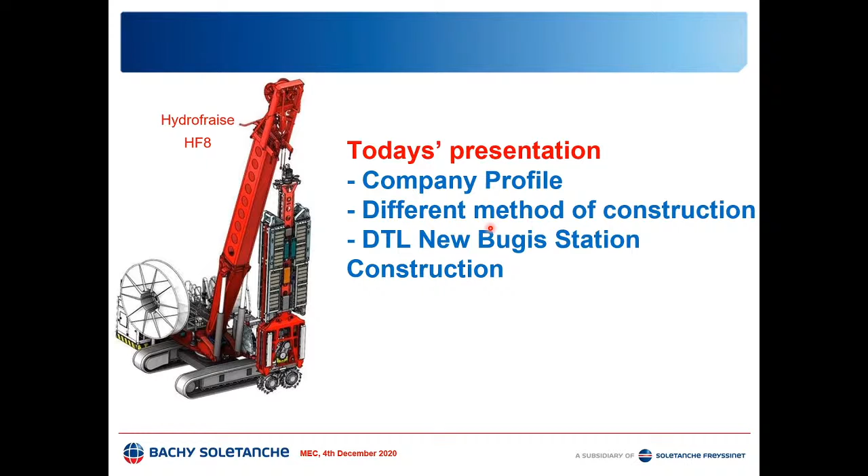Okay, so today's presentation I will split into three parts. One is just a small intro about the company that I work for, and I want to talk about the Downtown Line new Bugis station. But before I do that, I want to explain a little bit of a different method of construction. This is the company I work for.

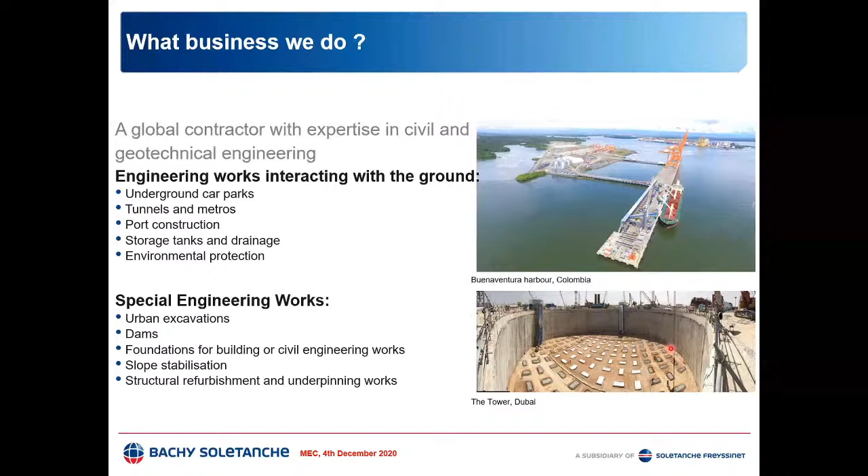And then foundations for buildings or civil engineering works. We do a lot of foundations. We do slope stabilization. We do structural refurbishment as well and underpinning. So the team is important. There are more than 10,000 people working. But what we bring to the field is actually the people. We come up with very innovative design solutions. And there's a very strong plant and fleet, the equipment that we use to construct those. And then our commitment to sustainable development.

Talking about geotechnical, the future is all about sustainable technology, and we need to keep an eye on this as well. So where are we? We are present all over the world, in more than 100 countries. We are well established in 40 countries. In Asia alone, we do close to 400 million euro turnover. The company employs more than 10,000 people, and we have been in Asia from 1938 onwards.

This is KLCC, the Petronas Twin Towers in Kuala Lumpur. I was not part of this company yet because this was 25 years ago, but I was actually working with a consultant who was involved with this foundation design. So I was part of the design team developing this, and I was instrumental in analyzing the pile group and the raft analysis. And by the way, that's actually the deepest foundation in the world at 125 meters.

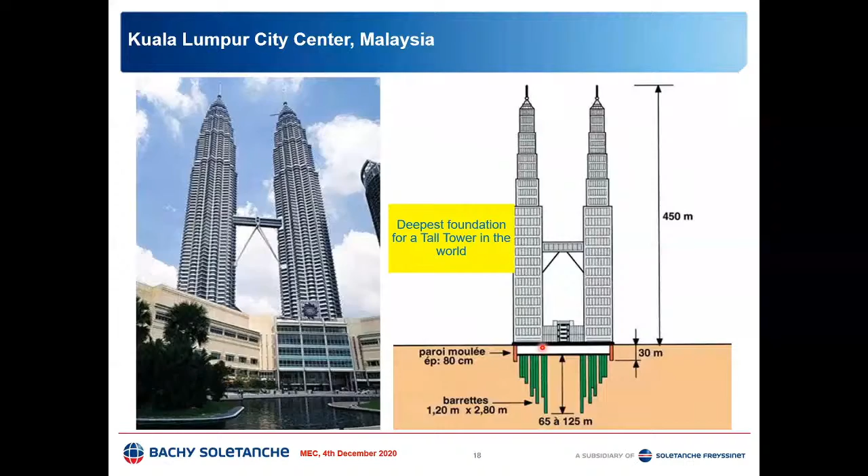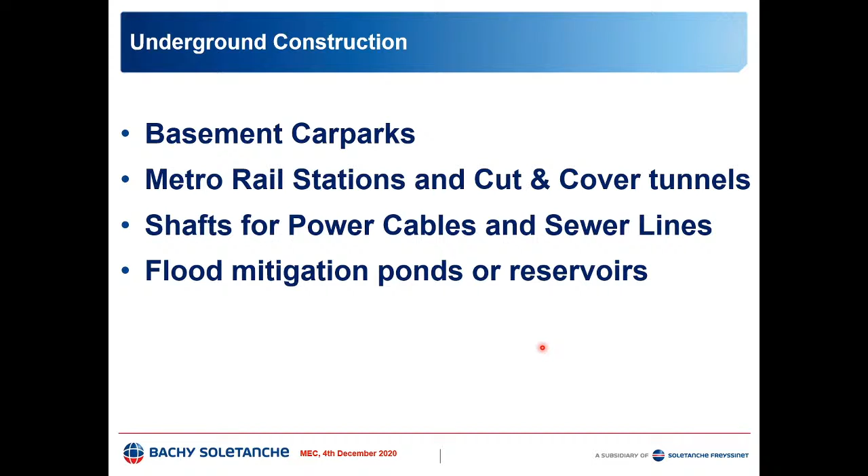And with that small introduction, I would like to get into today's topic. But before I go there, I just want to explain, because in the topic I'm going to talk about, there are 3 different methods of construction that were used: the bottom-up construction method and the top-down construction method. And I want to give a small introduction before I dive into the details. What exactly is a bottom-up construction?

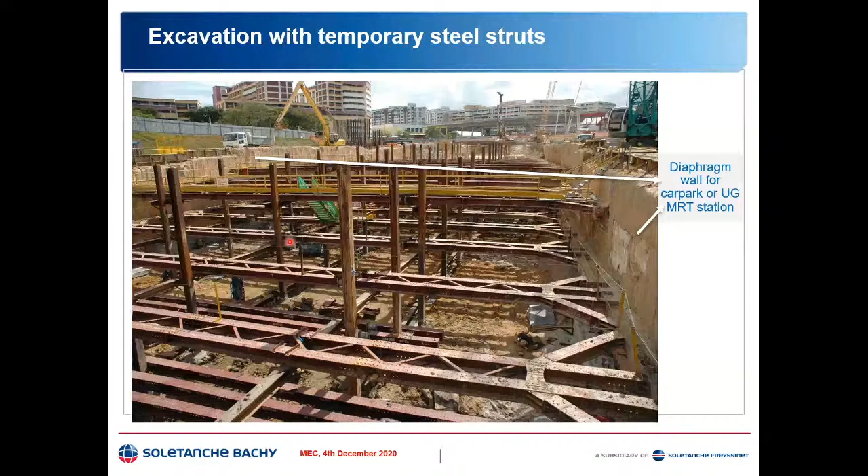So you've got diaphragm walls, which are retaining walls that are constructed on both sides. You can see here there is a diaphragm wall constructed here. There's a diaphragm wall constructed here. People are trying to make an underground metro station here. In order for you to excavate down, you need to have this wall, and you need to have struts that support this. You need to have king posts that actually reduce the span, and then you need to have the walers. Once you've got all that, then you go down.

So the bottom-up construction is you use the steel struts to go down. Once you reach the bottom, you pour your slab and you start making the slabs on your way up, bottom up. When you're coming up, you start to remove these temporary props, these steel struts. And once you have removed them, you've got the permanent box in place and your structure is complete. So fairly simple and straightforward.

What is good about bottom-up construction is this is open to sky construction. It makes it a lot easier for a crane that's sitting here to drop the material to install the struts. Or if you want to pour the slab, you have to put the rebar. You can actually send this through the gaps, and then you can pour your slab with the concrete truck here. And then when you're removing it, it's easy to use a crane and remove it. Everything is open to sky. I will say why this is important.

The next type of construction is you can actually use anchors to do that. When you use anchors, this was the ground, this is the wall you have just installed. You excavate, you install an anchor, you reach the final depth, you make your slabs, and then you go up. Pretty straightforward. This is even better than the strutted excavation because this is completely open to sky. It's a lot easier to muck out the earth from here. And then when you come up, you de-stress the anchor, and then come all the way to the top and complete the structure.

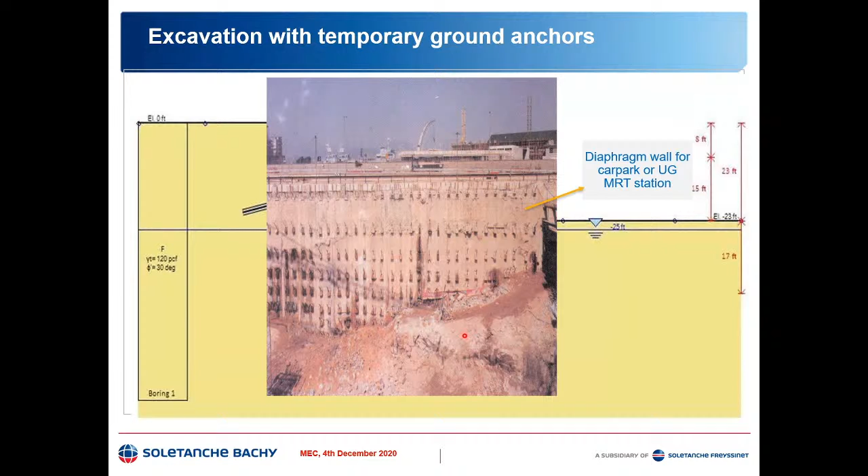Just want to show you one job that we did in Hong Kong. This you can see is almost 25, 30 meters deep. You can have 7, 8, 10 levels of anchors. There are so many levels of anchors, no issues. You install the anchors as you go down. You can see this is a completely open to sky excavation. It makes it a lot easier to excavate. When you have done that, you make your slabs and then you complete the job.

But if you manage this correctly, there is a very good chance that you actually save the money that you spend on temporary props. But also, if you're having a tower in the middle, while you're going down, you can take the opportunity to start to go up. You can actually let the tower start to go up while you're still going down. So there is a time saving. You spend a little bit more money, but it's got some good benefits here.

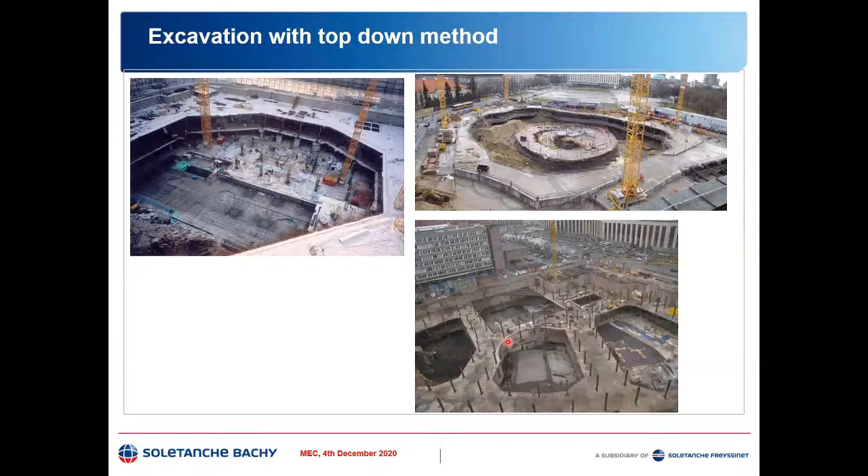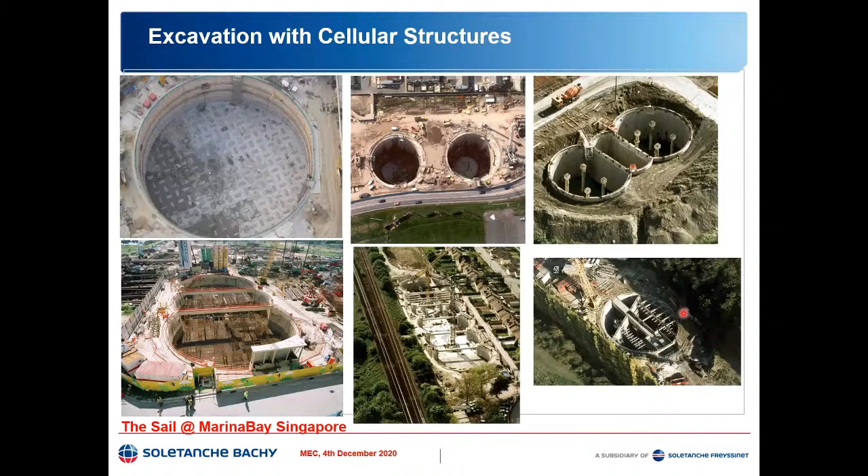So with that small introduction, this is actually the basement we did for The Sail at Marina Bay. This looks like one big circle. In fact, this is a peanut. This is one circle here with a cross wall in the middle. You can imagine how open to sky. It's very easy to drop the material, pour the slab, and reach the bottom. This makes it very, very easy and a very, very efficient system.

So with that small introduction, I enter into the main topic, and I'm going to spend the next 45 minutes explaining this. This is a very complex project, and I hope you can follow. And if you have any questions, please ask, and I'm happy to share what we have done here.

So, new infrastructure in a mature and urban environment. The new projects that we do in Singapore, Malaysia, or in Delhi, Chennai, Kolkata, or in Kochi, are no longer done next to a green field. There are already existing buildings. There are people living there. So there are things that you need to take care of. With all these constraints in mind, you should still come up with a safe way of constructing all this.

So you need to come up with some innovative solutions to resolve the problems that the expansion of underground infrastructure brings. You can always put it above ground. Once you do that, there are a lot of constraints. If you want to make a road underneath or you want to have a facility crossing, that's not easy. But if it is underground, you can do a lot of things on the surface. But of course, you need to make sure that the underground structure doesn't move in future.

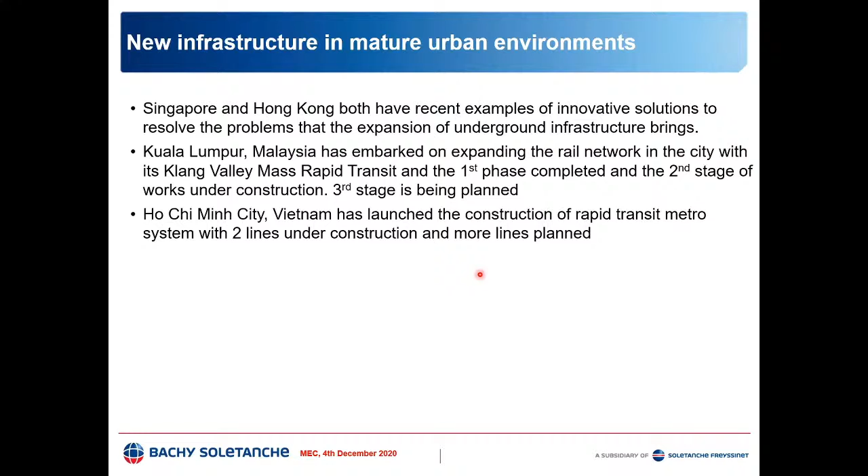So Kuala Lumpur, Singapore, Hong Kong have done quite a lot of work. Kuala Lumpur has actually done the first phase. The second phase is under construction. The third is being planned. Ho Chi Minh City in Vietnam has 2 lines under construction. One is already in operation. And India, of course, is one of those places you want to be.

If you want to be in underground construction in metro: Delhi, Mumbai, Chennai, Bangalore, Kochi, Kolkata have operational metros, and in many cities, Pune, Hyderabad, a lot is under construction or under planning. So if you really want to be in this, the next 20 years in India is the place to be.

So in this presentation, we are going to look at a new Bugis station. I will go into the details shortly. This Bugis station is actually in a very congested environment, and how we managed to construct it is what I want to show. Before that, I just want to give a small intro to the Singapore MRT system. This is the system map in 2020. I won't go into the details, but you can see the different colors.

There are east-west lines that run from the west to the east, to Changi Airport, and there are north-south lines, north-east lines, circle lines, and this is what you have at the moment. There's a downtown line, which is the blue line, and you can see here it just circles around and goes to Changi Airport again. But by 2030, you can see that this map will start to look like what you see in Tokyo or in Paris or London or New York.

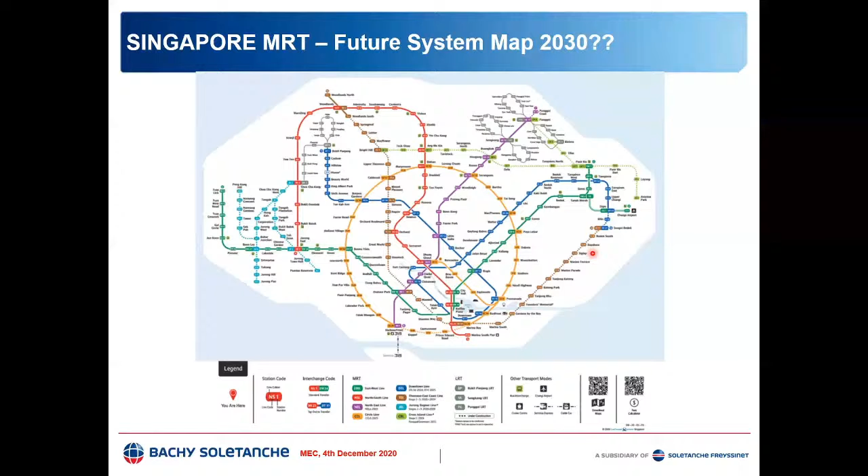So this is supposed to cross 360 kilometers by 2030. And there is a Cross Island Line which is under construction, which I'm tendering at the moment. So there is a huge amount of work being planned in the next 10 to 12 years. These are the future lines. I just want to give you some line names: Tuas Extension, Jurong Line, which is under construction. Thomson East Coast Line should open completely in the next 2 years.

Cross Island Line, the eastern side is being tendered, the western side is just being designed. Northeast Line, which is already being extended. The Downtown Line, which is in operation. There are a lot of things under construction in Singapore. So now Singapore has a network of 122 MRT stations and 40 LRT stations across the island, and more to come.

The railway network is one of the most popular modes of transport in Singapore. The whole idea is to make sure that nobody walks more than 10 minutes to reach an MRT. This is actually the government's target. With that in mind, they are coming up with so many lines: the Cross Island Line, Jurong Line, Circle Line, Northeast Line, and Downtown Line. So by the time we reach 2030, we'll be at 360 kilometers. That's the goal, and I think we will get there.

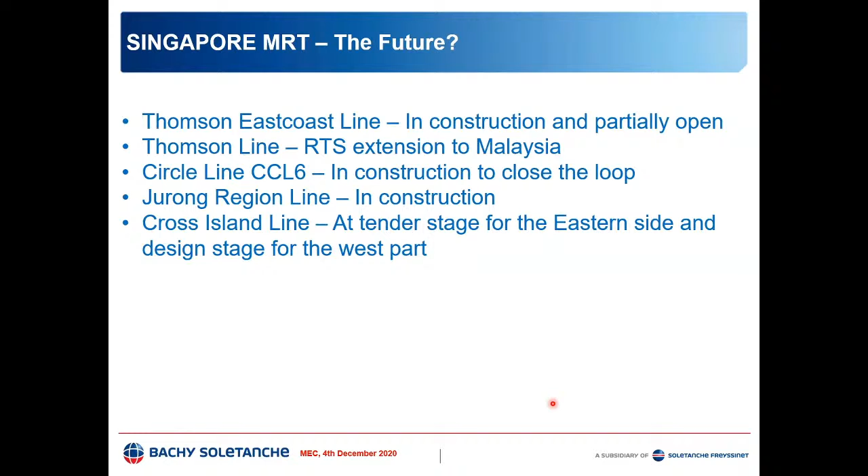The future, this is what is being planned or constructed: Thomson East Coast Line, Thomson Line, Circle Line, Jurong Line, Cross Island Line. This is the map again; I just wanted to show where we are. The project we are going to talk about is Bugis, the blue line, which goes below the green line. That's actually the main challenge. This line is to be constructed underneath the existing green line, which is the east-west line.

So just some intro. The client is the Land Transport Authority. The designer is Arup, supervised by a firm now called Golder. It has been in operation from 2013 onwards. The station's basic structure was completed in 2011, with the system-wide rail contractors coming in over the next 2 years to finish it. We got the job in 2008, so it only took us 5 years to complete the station and be operational.

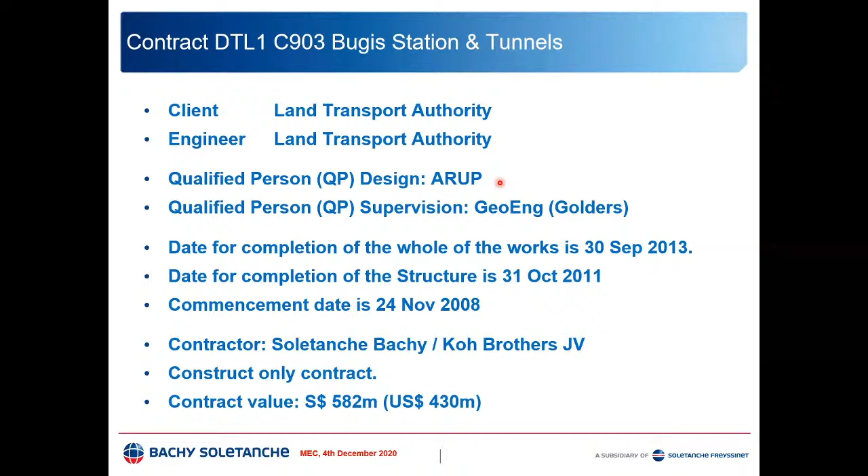Soletanche Bachy is the company that I work for. We are in a JV with another company called Koh Brothers. This contract is worth almost $600 million, which is roughly 3,000 crores. I don't have to go into the details. There are a lot of diaphragm walls, grouting works, mining works, and a lot of civil works. It's a huge contract.

So exactly what are the constraints we have? What is this area? This is the station we want to construct. It is next to a hospital. Once you have a hospital, this is a sensitive area. You need to make sure that your vibration is controlled, your noise is controlled, the dust is controlled. There are a lot of controls in place. And this is actually an office.

This gives you a bit more flexibility, but in terms of engineering you still need to make sure you don't create any settlement next to the building while making this station. This is actually a shopping area, which means there will be a lot of people crossing the road in the daytime or evening, and when they do that, they stop your work. So you need to manage that on top of the traffic.

This is one section of the area where there are old shop lots which are 80 years old. You need to preserve them, and there are people living there, which means you can't work at night. This makes it a lot more challenging.

And you have public housing, almost 600 to 800 families living there. I'll show some photographs later. This means your noise has to be controlled, your dust has to be controlled, and you probably can't work at night. There's also a sensitive 80-year-old row of shop lots that needs to be protected, I'll show this later. And there's an office where a lot of famous engineering offices are located.

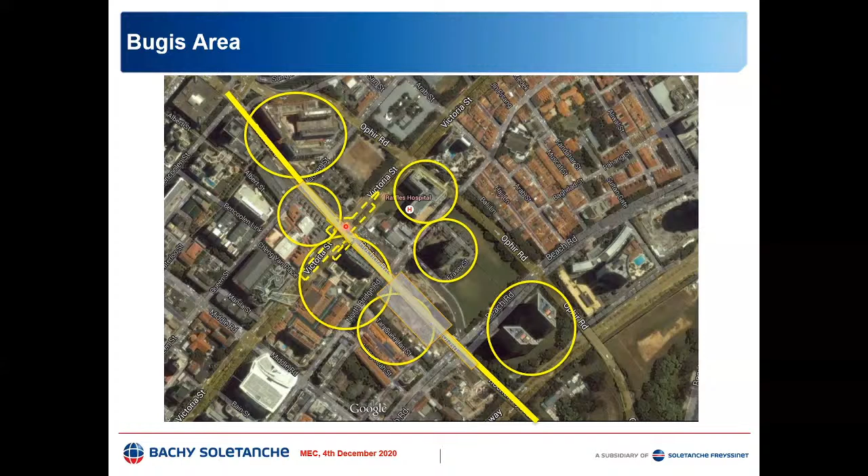There is an existing station that runs east-west, and what we want to do is make this yellow line underneath the existing station. So we will see the challenges in the next few slides.

Just some introduction, there's a couple of pictures to show. This is the main road, and under that we are trying to make the new underground station. This is the east-west line, there's the existing station, this is the shopping area, this is the hospital, and this is the sensitive old shop lot I talked about, sitting on mixed foundation. This is the public housing I was talking about. I'll explain a little more in detail.

One thing I want to highlight is these trees. They were there 15 years ago and are still there, we are not allowed to chop even a single tree. There's a tree here, we accidentally chopped one branch because a crane fell down, and there was a fine of $15,000, roughly 8 lakhs. That's the kind of imposition by the government, and that's why they're called a garden city, they try to maintain the greenery while building so many structures around it.

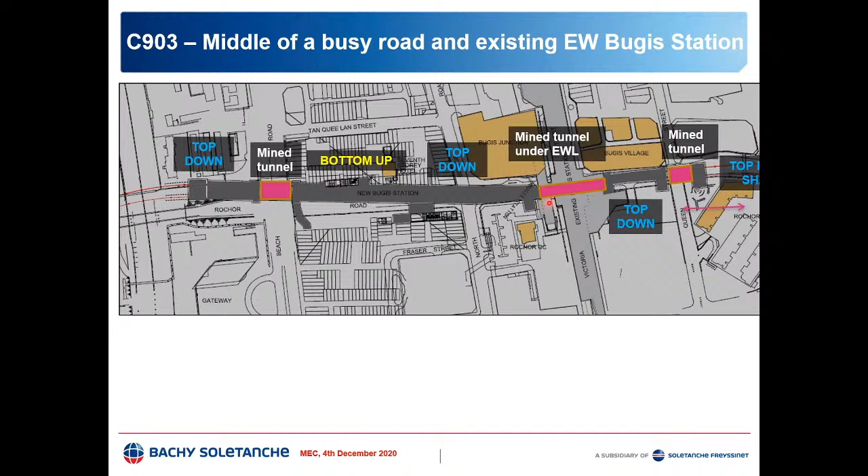So this is the engineering part of the presentation. This is the station we are trying to construct, you can see it's built in a few parts. This is the layout, and you can sense this station is not a small one. It's 600 meters long, that's huge.

Typically stations are between 200 to 250 meters, but this one is very long because it had a few junctions to cross. There's a main road here, and there are 4 major arteries, one going into the city, then 2, 3, 4. There's also a main road coming from Changi Airport, an expressway with a huge amount of traffic. You can't afford to just start digging here, you can swing the traffic on one side but not the other because they run in two directions. It makes it really challenging. And of course, this is the existing Bugis station, and we have to get underneath it.

You can see on the left-hand side there is a cut and cover tunnel where we need to get underneath. You need to maintain this. You need to cross, there's a crossover here where the train lines will cross over. And then you have two shafts, and you use that to do a mining activity here.

So this is actually the station. Of course, you have the entrances you need to build. This is the existing station, so you need to mine underneath. This is actually another interchange here and here, so you need to mine underneath using some shafts.

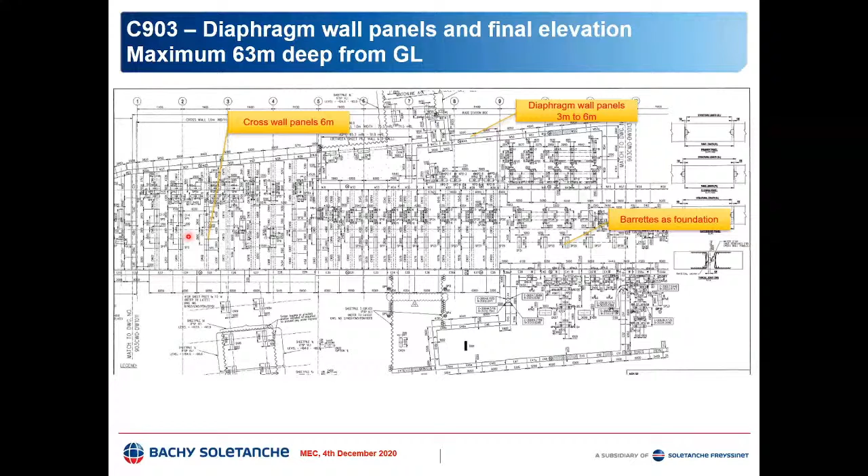Now how was this done? This was done using diaphragm walls. You can see the station perimeters using diaphragm walls, and we use Barrettes as foundation - these are rectangular foundations, like bored piles, but rectangular in shape. You can see the cross walls running between the diaphragm walls to beef up the robustness, and this makes the system very strong and reduces the deflection and thus the settlement.

And these are the design parameters. In Singapore, these design parameters are defined by the engineers, so these are control documents. If you need to change these parameters, you need to spend quite a bit of time to convince the client. So the bottom-up section - that's the reason why I gave an introduction at the beginning.

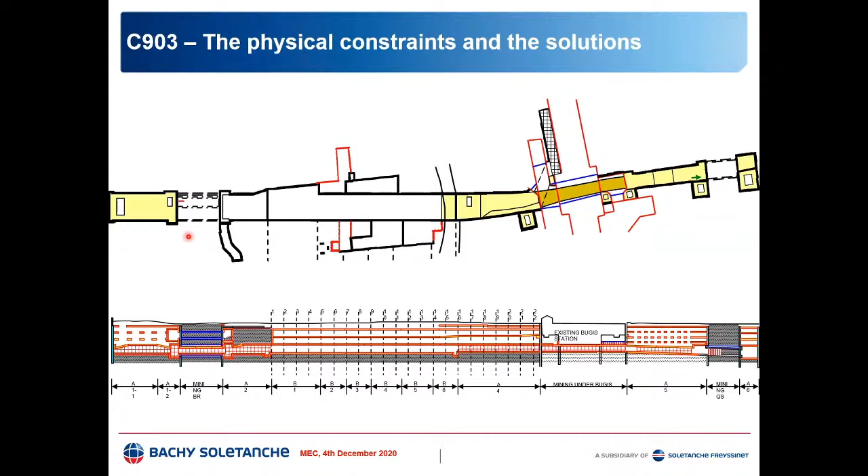So this was done - you can see here, this part was done in top-down, this is in mine, this is in bottom-up. The station was done in bottom-up, cut and cover done in top-down. This is a mine section, another top-down, and then you have another top-down and mine section. That's the reason why I gave a small introduction on bottom-up construction and top-down.

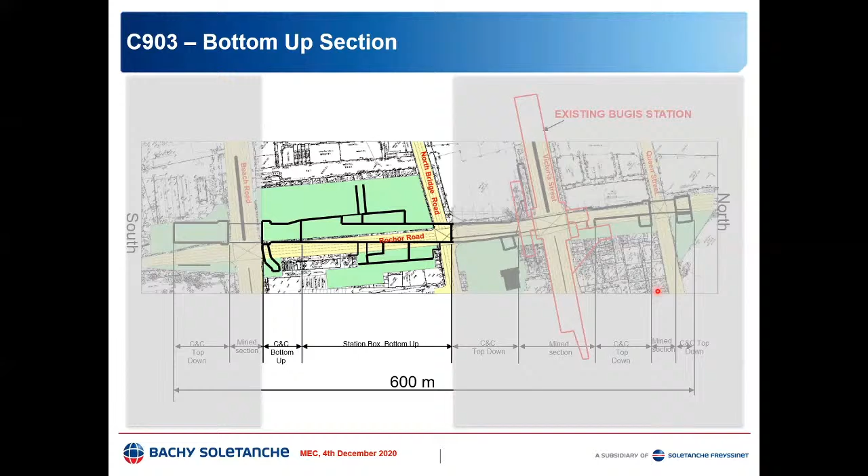So here, just to show you the sections where we are actually doing them in bottom-up. So what exactly is bottom-up? You need to have two diaphragm walls on both sides.

Just keep an eye on this - this is the diverted Rochor Road, meaning the traffic is running here. I will explain with some photographs later. So the traffic is diverted, so you can actually mobilize your equipment to start making the diaphragm walls.

What you want to do is the jet grouting. So you make the diaphragm wall, you make the jet grouting. And then in the next stage, you finish the diaphragm wall on the other side. You actually drive sheet piles on both sides, which I will explain why later.

Once you have done this, you can start excavating. The traffic is still running outside because you start to excavate here. Because this is an open-to-sky excavation, the traffic can never come back to here until you finish this. Bottom-up means you put the struts, go down all the way, and then you come up and remove the struts - until then, you can't have traffic running here.

This is what has happened here. You can see the people have gone down with a few number of struts and they reach the bottom and then they pour the slab. You can see here, you have reached the bottom, they are making the slab.

Once you made the slab, you start to come up, you put in the other slabs, and then you actually have to backfill this to put the traffic back, and because of that you need the sheet piles on both sides. Once you have done that, you backfill, you reinstate the traffic back on this. Now the station is completed.

So you use all the struts to go down, and then you pour the slab. As you come up, you remove the struts, and then finally you pour your roof slab and you backfill on top. Once you have done that, you start to backfill this as well, reinstate and pull the sheet piles out, and then you open the traffic again.

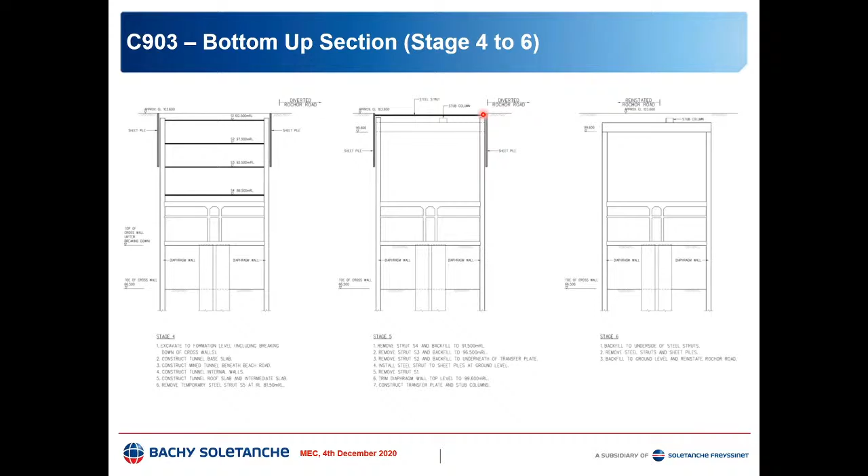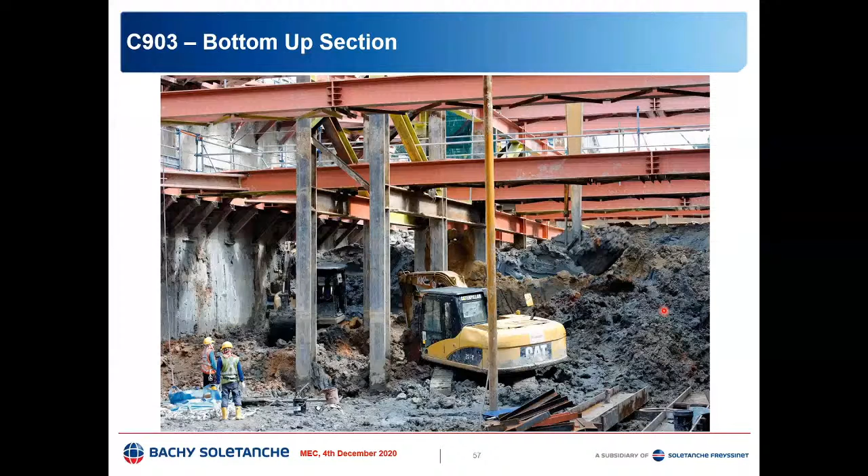So this is into the construction itself. You can see these are soft marine clay. I think Singapore has a lot of marine sediments, so these are very soft material. The struts are installed, and I think we installed 9 struts on the way down.

One of the biggest challenges when working in the city is utilities like this. You can't snap these utilities and push them away because some authorities don't give you permission to do that. You need to support this while working on both sides. You're going to excavate 27 meters below, but you need to have this utility supported right until the end. So this is one of the biggest challenges. Although there was an advance contract, some utilities cannot be diverted, and we had to take care of it.

So now, as I said, the traffic was being swung here because there is quite a bit of work to be done. You remember the traffic was running here? Now you see quite a bit of work is completed. You see the traffic here, then we start excavating down to go further. The important thing is the trees are still maintained. You can't chop the trees - if you do, you can lose the license and get kicked out of the project.

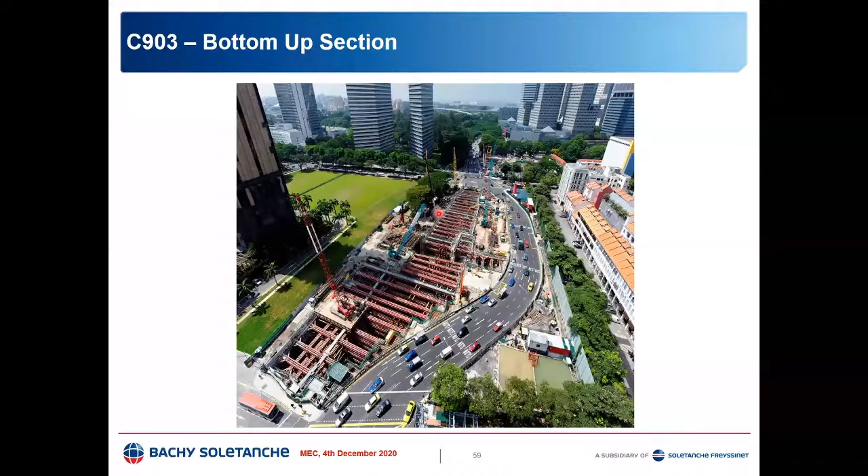Right, so now here we have excavated. You can see here we are about to pour the platform, the under-platform slab. You can see the series of struts that are there - these are the diaphragm walls that we make, and these are the struts. There's a lot of cross walls here that support the diaphragm wall from moving in and reduce settlement outside.

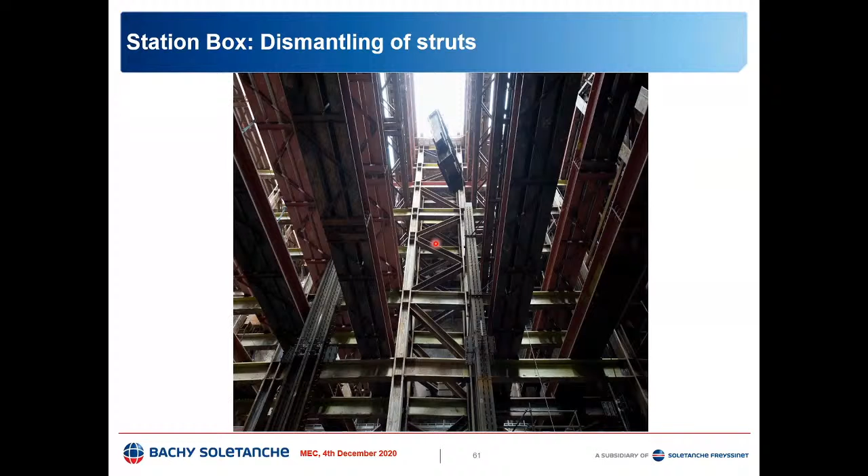You can see the number of struts - there are 9 of them from top to bottom. You can see that people are dropping material through the gaps, so there's a lot of engineering planning behind this. Now this is nearly done - I think this is one of the openings for the extract fans through the slab.

This you can see is nearly completed - the diaphragm wall on the right-hand side and the slabs are completed. When the work is completed, you can see the hole is gone. They have already completed the roof slab and are doing the last backfilling, with the last struts still there.

So they're coming from there to here. The struts are being removed once they finish the backfilling. Once that's done, you put the traffic back and straighten the road, and the work is completed. Next, you hand over the station to the system-wide contractor to come up with the rails.

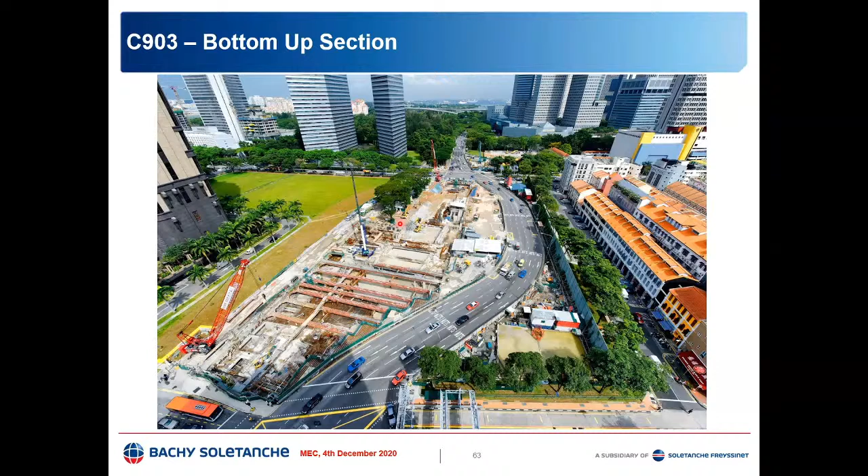This is the completed station with the bottom-up section. So next is the top-down section.

There are areas where you couldn't actually do bottom-up construction, because there is a place where you need to maintain the traffic on top. That means it's a cut and cover tunnel. You go down, you make a roof slab, you backfill, you put the traffic back and you start mining underneath. This is actually the top-down construction, done where you just couldn't do bottom-up construction.

You can see here there is no room. There's actually a shopping mall here, a community center and a car park. You can't divert the traffic here. They have no choice. You can't close the lanes because if you had 5 lanes before, you still need to maintain 5 lanes during construction.

So you have no choice but to do a top-down construction. You make 2 walls, excavate a bit, pour your slab, backfill, put the traffic back, and once this is done, you can start mining underneath. You need to excavate below, casting the slab as you go down.

How do you do this in top-down? First you do one side of the wall, then the other side with a sheet pile installed. You cannot pour the slab because to do that you'd have to close the traffic. This is not possible because there is a building on the left and a car park on the right. So they put the traffic here and then go down to make the roof slab.

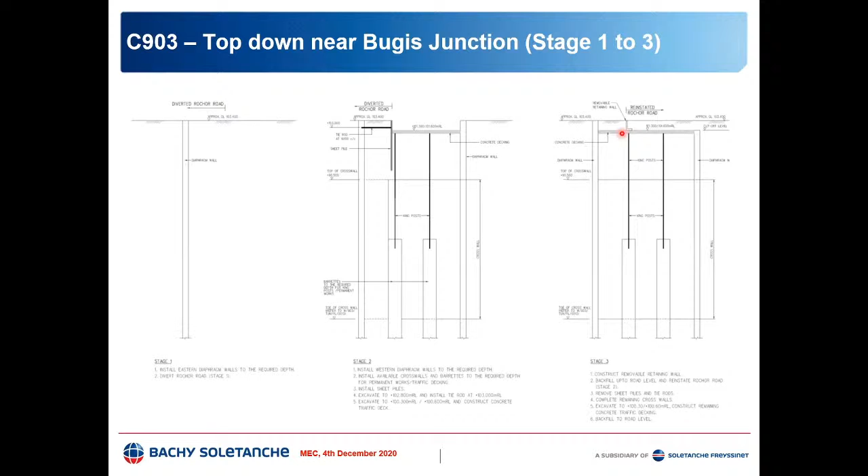Once this is done, you have to make a small retaining wall inside to backfill on this side. Once done, you can reinstate the traffic. You can see here you have not excavated, but the traffic is back. With this decking in place, you can continue excavating.

Now the traffic is running on top, but because the decking and roof slab are there, you start excavating, make the next slab, excavate, make the next slab, go down, and make the platform slab and the platform.

So this is where the trains will be running. Once finished, nobody knows that you're actually making a 27-meter deep excavation underneath. The traffic is running like it has been before, and this is completely reinstated when the work is completed.

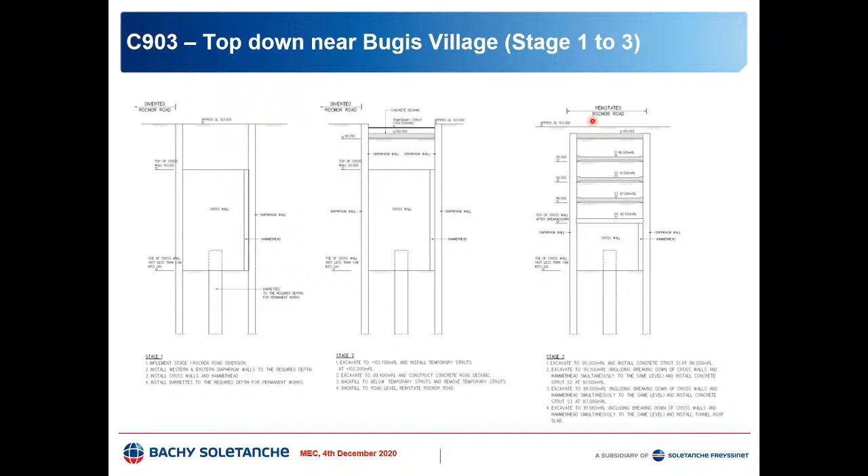It's exactly the same. You install the 2 walls with diverted traffic. Once done, you go down and make a traffic deck and then your roof slab. When this is done, you reinstate the traffic, and once that's done, you go ahead and finish. You go down, make the next slab, excavate, next slab, all the way down, and you have trains running here. So that's the way this top-down is done.

So I just wanted to show you some pictures. This is actually a portion where the top-down construction was done, somewhere around this width. They managed to cut into part of one of the car parks, so they maintained the number of lanes. Eventually, the traffic has to come here.

Now you can see here we are working next to this building. You may think that this is a cheap building, but it's actually 80 years old, sitting on mixed foundation. This can settle even for the slightest movement. We are working so close to the structure. The business is in operation, and you can see the machines working 1 to 2 meters away from the building. We are installing some sensitive diaphragm walls here.

And once this is complete, we actually reinstate the traffic and mine underneath here. That's the point of this whole thing.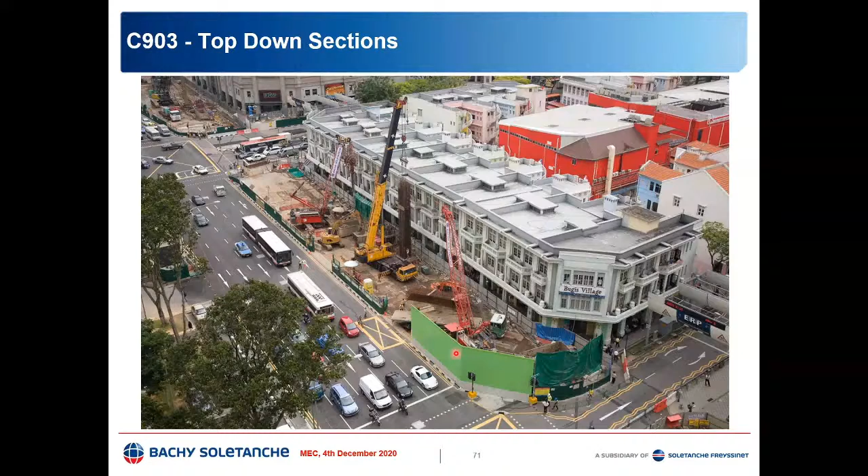I wanted to show you another view of the same thing. You can see that same building, and you can even see that it's tilted. This is 80 years old; people have worked over the years and it has actually become like that. So it's very sensitive, you have to take care of this. And you can see here, there's a view.

We are actually dropping a diaphragm wall cage, and you can see the public housing at the back. There are about 5 or 6 blocks. They are demolished now, but there used to be 500 to 600 families living here. Any small noise, people will complain from there. We have to be very careful.

So the machines, you can't just simply use any machine. So we have actually come up with a lot of innovations. We have to actually cover them up, and we actually have to make sure that they don't overheat. We need to provide the ventilation. Of course, for the guy who's working inside, we have to provide an air-conditioned cabin. And these machines are some of the silent machines that you can find.

So this is another view from the public housing. You can see that the traffic is being diverted. This is actually bottom-up construction going on. And this is where the top-down was done. And they reinstated the traffic, but they are working on this side because there's mining work going on underneath. This is the existing station. And there is mining work going on here, but you still need to maintain this road.

This is the reason why you cannot just simply dig a hole and finish this work. You need to maintain the traffic. That's the reason why you have to make a shaft on this side, and you mine underneath it. I'll show you some of the details, how the mining is done. You see, this is actually the shaft where I'm going to mine underneath. I have a shaft on the other side where I'm actually driving my pipes and mining. This side I'm mucking out.

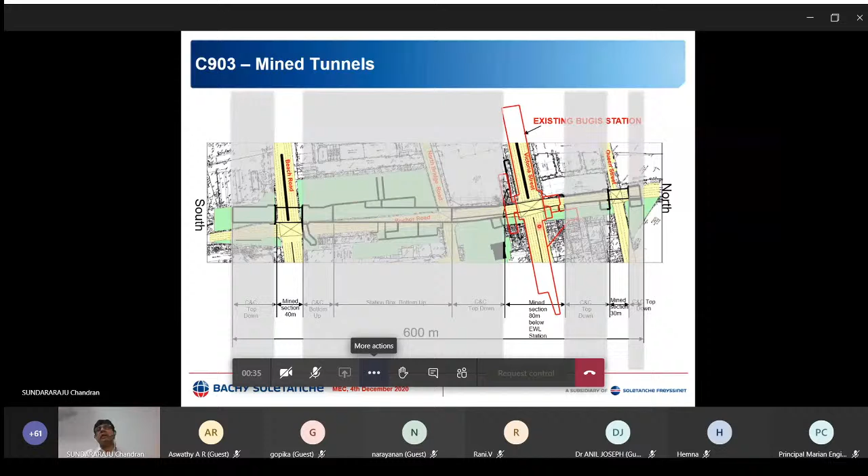But when I'm mucking out, I'm using the telescopic excavator. But of course, it's noisy. These people will complain. We did this almost 35 years ago, 1985. And I think Dr. Anil said he referred to that paper in his 1992 PhD thesis. So the chemical grout piles were done. The diaphragm walls were done by us. So I will just show you some of the details.

This is just a 3D view of the mining. The mining is actually done underneath the existing station, under Queen Street, under Beach Road. These are the 3 areas where the mining is done. So what is mining? What you normally need to do is make a shaft on both sides, install these pipes horizontally on the sides, the top and bottom. Once you have done it, the soil is secured inside. You start excavating inside this section.

You excavate 1 or 2 meters. Of course, the soil will start to collapse. So you need to start making these frames. You make these frames with these columns, the girders. Once these are done, you advance another 1 or 2 meters and you put the next piece of girder. And then you excavate further. So you keep on moving further using all these equipments. And then you keep on putting these girders and the frames in place, which support this roof and the pipes. And that stops the soil from settling down.

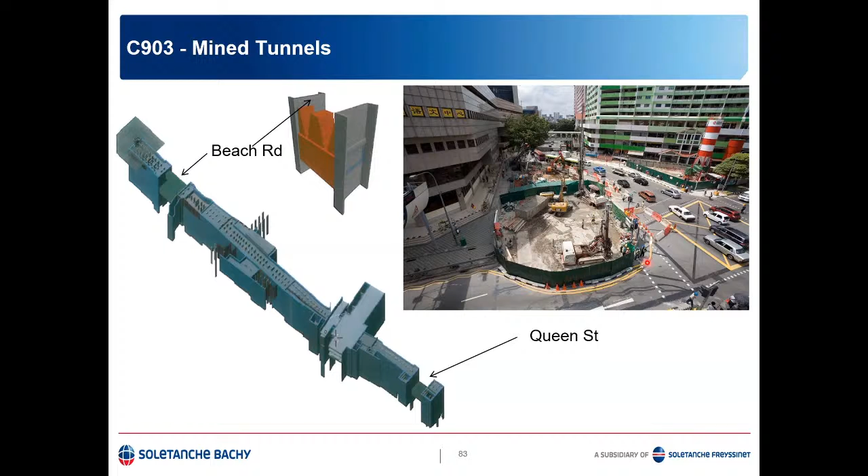If you have a live station running above, which is actually what we have, once these pipe roofs don't move down, the train operation is not affected. They can continue to be in operation. This is actually the principle of the mining that was done. So this is actually on the northern side. You can see here there is a shaft made on this side and this side to do the mining.

These are just some of the busiest roads. You can see the shaft here, and there is also a shaft from this side, which is part of the cut and cover. And the mining is happening underneath here. I will show you with a schematic sketch later. Once that mining is done, you go down to the wall here. The wall here, you have to cut through the wall to make the rectangular box. That's exactly what this photo is doing.

So the guy is actually cutting. He's actually coring through horizontally. And then these blocks will be removed. Of course, there's soil behind which can fall on your face, so we need to take care of this. I will show you what we do to take care of this.

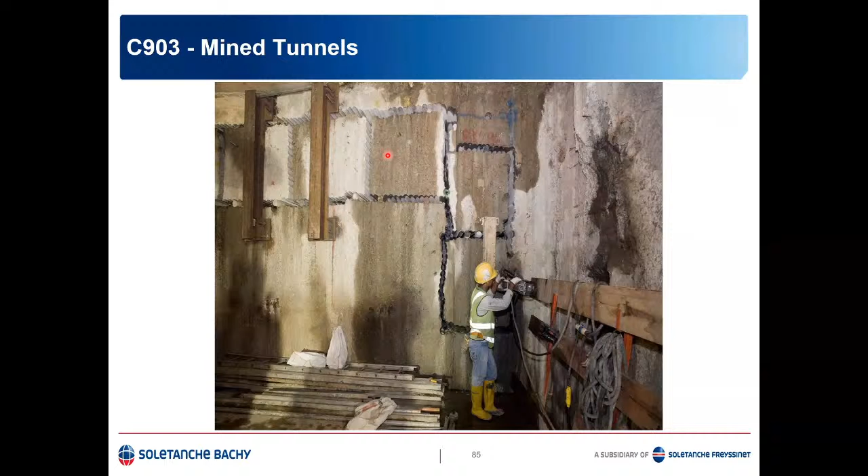So you can see how the pipes are being installed. These pipes are being installed like that. These are pneumatic hammers. These will ram through. So you will have pipes that are being injected with the ramming action. Once these are done, they are clutched, and they will actually form this kind of jointing. Of course, you are actually making ground improvement, and you have to ram these pipes through very hard, but that's the way this work was done.

And of course, when you are driving these pipes, you can see here, they are doing these pipes. Once they reach the other side, they will start to go down and try to wrap up. Of course, we did only the 3 sides. We didn't have to do the one at the bottom. But when you are doing this, you can see they reach the other side.

But these pipes installation is not easy because there is quite a lot of resistance when you are driving the pipes, because you're going through the soil or the ground blocks, and they are trying to come out. There is resistance from outside as well as inside. So we will actually have the augers to screw through and remove the soil. Once you remove them, the resistance reduces and we can advance the pipes.

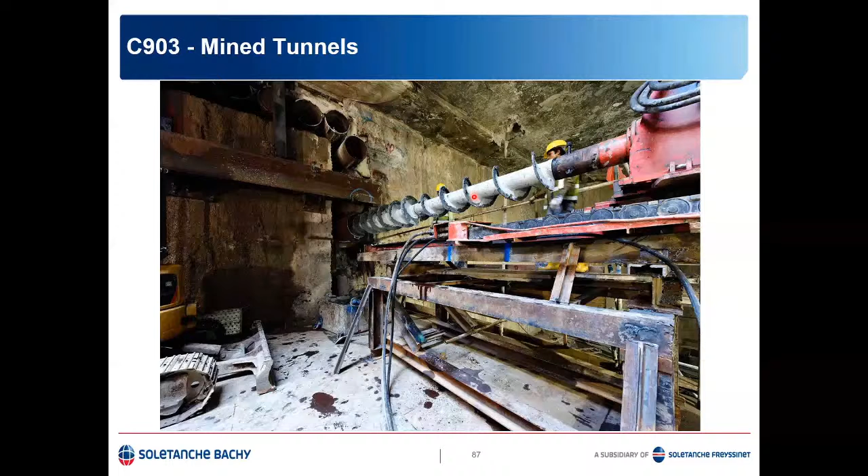It's not just this. So you can see here the pipes are all installed, and we are starting to put the first frames in place. These frames you are putting in, and you need to make sure that they touch this. So you need to close the gaps all the time, and you start to break. So you see the wall is still there. You need to break through the wall, but they are securing this first. Once they put the frame, they will start to go in, and this is what happens.

You can see here the wall was not broken yet, but here they've not only broken the wall, they start putting the next frame, and you can see all the equipment, the excavators are working to remove the soil, and as you remove, you're putting more frames, and you reach the other end here.

And of course, when you're doing all this, you are not allowed to have a settlement of more than 15 mm. And this is the key to the success of this project, because anything more than 15 mm, the train which is running on top, the operation can be affected. So you have to be very, very careful, because if you reach 15 mm, work suspension will come, and for the next 4 months, they will completely stop your work.

You need to actually first show why you caused the problem, whether it's because you made a mistake with the design or with construction. Then you have to come up with a remedial. You have to prove to all the authorities, and they have to be convinced. Then they allow you to put the remedial works in place, and then you start. You lose 4 to 6 months.

This is a disaster. It's not just an independent station, because you can have 20 stations as part of the same line. The entire line can't operate because one of the stations is not ready. Everywhere else is ready, but in one of the mining sections, instead of 15 mm, it moved 18 mm, then it's a disaster. There's a delay of 6 months to 1 year. You can actually lose all your profit and even make huge losses.

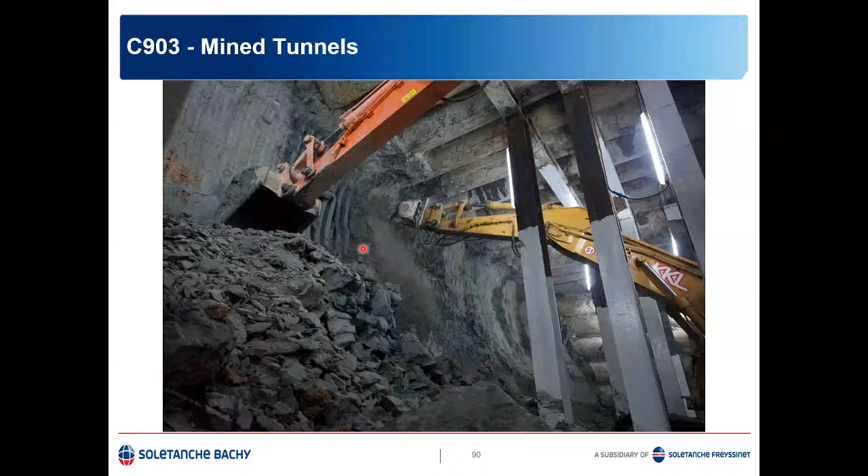So these are the road headers, and then the excavators that are removing the soil. And once you reach the bottom, you can see the pipes are still there, the frames are there, and they start to pour the slab.

Okay, this is the juice of this entire presentation, which is the existing station, how we get underneath 80 meters. So this is the photograph. I think this is the project that Dr. Anil referred to. This is an old station under construction in 1985. Earlier you saw the green color building, it is this building. So we are trying to make a new line like this. This is the old station being made.

This is 1985 to 1989. And then now we are trying to get underneath this. You can see even in those days the traffic was swung to make this construction possible. Now, this building that I was talking about earlier, can you see there is actually a small tilt here? This tilt is from 1986. And if you go back to the photo that I showed earlier, I just want to show it because this is interesting.

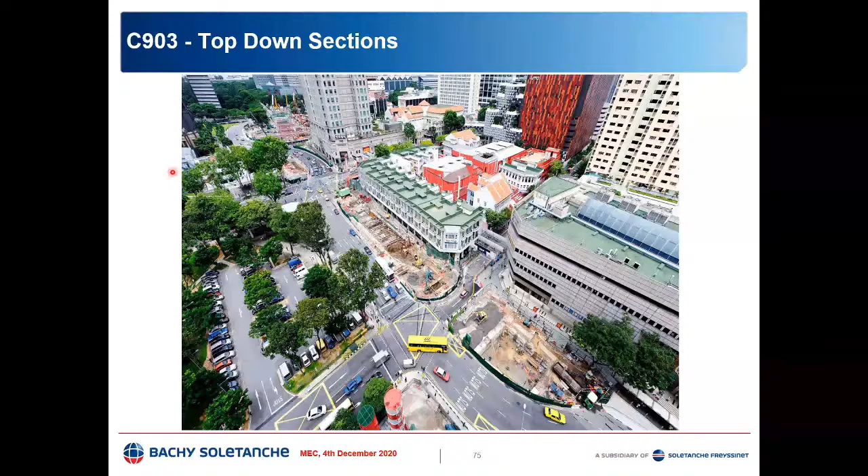You can see here there is a small tilt. It's exactly this building. That photo was taken from here. You can see there's a small kink. This kink was there. It's one of the disputes that came. We said that we have an old photograph that shows the kink was there even in 1986. Then the authorities believed this was not caused by us.

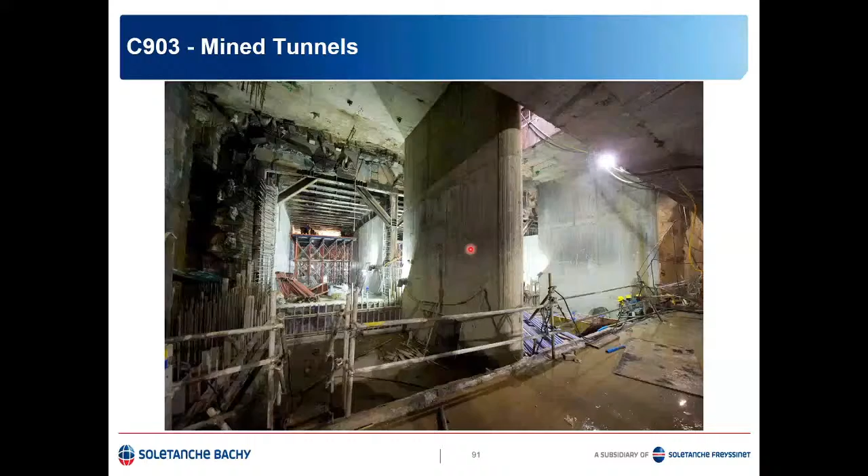So these are one of the biggest challenges when we are doing projects. So you can see from this old photograph, the kink is always there. So this is the building that we are trying to protect 30 years later. So the good thing about engineering works is you do a work 35 years ago, you come back and try to do another work underneath here.

So sometimes this can be good, sometimes it can be bad, but I will show you an interesting aspect of this here. You can see there is a diaphragm wall being made like that. This is where we are going to cut underneath later. They needed this for the platform, but there is a use for this later. I will show you with some photographs.

So this is the existing station. Now this is the south wing and north wing, and we need to make the mining underneath. This is 80 meters long. And then there is a paid link. Between the existing line and the new line, you need to let people cross without tapping out. So it's a paid link.

And then we need to make the access through the northern side to make this mining, because if you just do it from one side, it will take forever. We do it from both sides. And then we need to make some mining underneath to make this paid link possible. And then we also need a shaft here to do the mining from here. So we created 4 accesses just to do this 80-meter mining. So there is a temporary shaft made just for this. This is purpose built. And once this is done, we start to do the work.

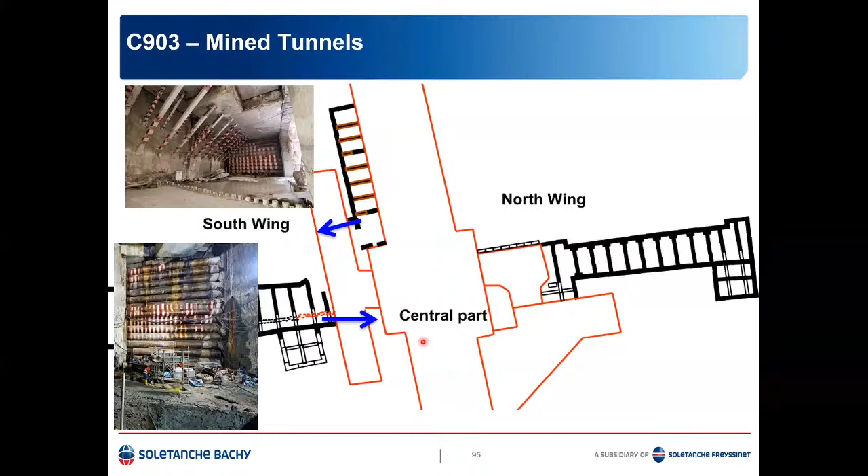So this is the south wing to make the paid link. And this is the drive, the pipes that you start to drive underneath the existing station. And you also drive from the northern side towards south. And then this is for the paid link. And then, of course, you are driving the long pipes here. And this is a part of the cut and cover closer to the Bugis village. So I'll show you with some pictures.

You can see here on the northern side, Queen Street. This is the busy road that I showed. You need to maintain this. So this is part of the cut and cover. You make a new shaft to drive the pipes underneath the road to make the rectangular pipes, and then put the frames to excavate underneath while the traffic is running in both directions.

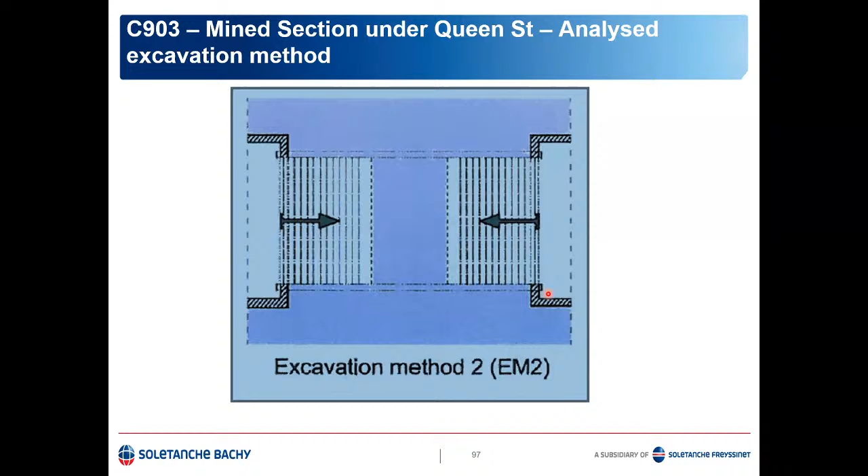This is a challenge. How this is done, of course, you need to make ground blocks. You have to do it from ground. You close one lane at a time and do your ground improvement blocks. Once this is done, you go down. We remove this pipe at the bottom, but we replace it with a temporary slab. And you have to do some grouting all around.

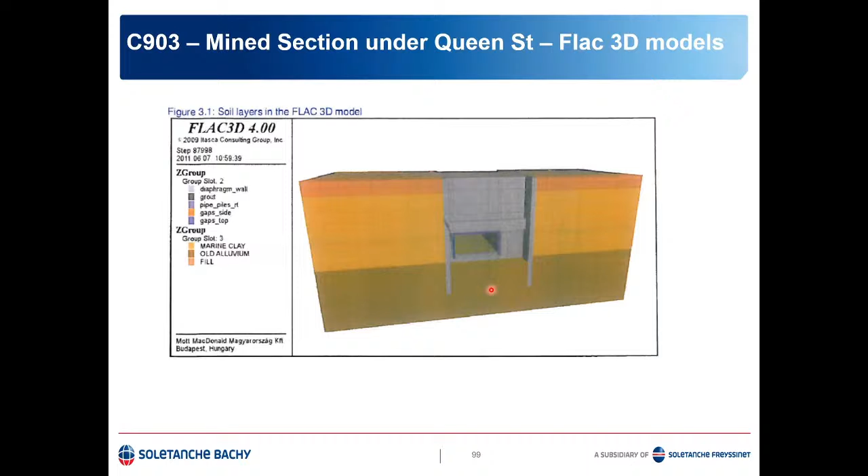And once you have done this, of course, you need to do a lot of analysis. There's some improvement we did to the original design. And we have to prove to people that the movement is less than 15 mm and there is no damage to the adjacent building and so on. I hope I have another 5 minutes.

I should finish quickly. These are some of the 3D analysis. This is a bit fancy because this was done 11 years ago. Nowadays, people do a lot of 3D analysis. 11 years ago, this, I think, was done in Hungary using one of the consultants from Singapore. And these are the structural elements modeled. These are the forces you get from every single steel set, the frames. The bending moment is calculated for each and every one, and you design for it.

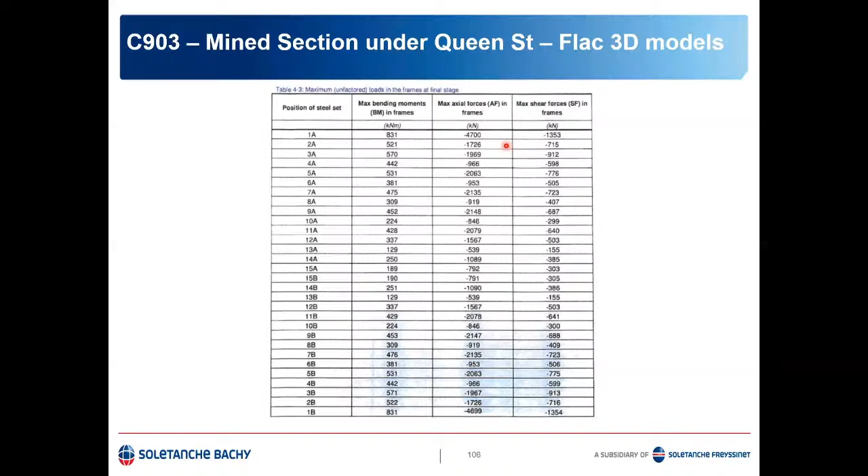And then, of course, when you're driving these pipes, what I was saying is we did this 35 years ago. We find some of the king posts that are left in place, and we try to drive the pipes. This is actually in the way. So we have to send somebody through a 900 mm pipe. The guy goes in, cuts the H-piles that we provided, the king posts that we installed 35 years ago. He cuts it. Once this is done, the pipe installation is completed. And once the pipe installation is completed, we can actually start the mining underneath.

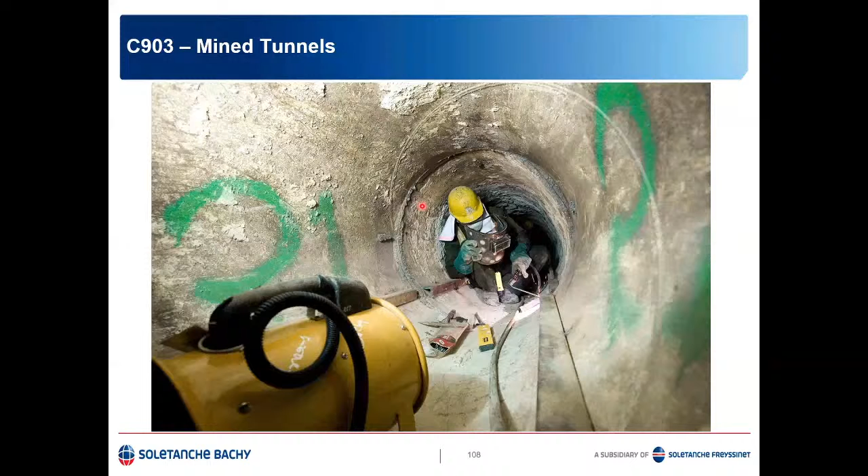So here is the section that we are about to start. The pipes are in place. These are the top roof pipes. We need to excavate almost 10 meters below. This is actually the top roof, pipe roof. This is where the train is running. The existing train is running like this, east-west line. And this is the pipe that we have driven underneath that platform slab.

And from here onwards, how we go about doing this is the train is running here. We actually punch through this diaphragm wall. This diaphragm wall was made by us 35 years ago. We actually stitch core this and remove them. And of course, when you remove the soil underneath, we have no idea because we have no soil investigation to know what sort of soil this is, because the existing station is there, so you cannot drill any investigation to find out what the soil is. So we need to discover as we go down.

So we install ground improvement sideways. You can see here cement bags are there. You install them, and then you break the wall, making sure that the soil doesn't fall on your face. Once you have done that, you also have to put some nails. I'll show you. Okay, so here we have broken the wall through. You can see the marine clay. We don't know what the conditions are, but we have done the ground improvement horizontally from the shaft.

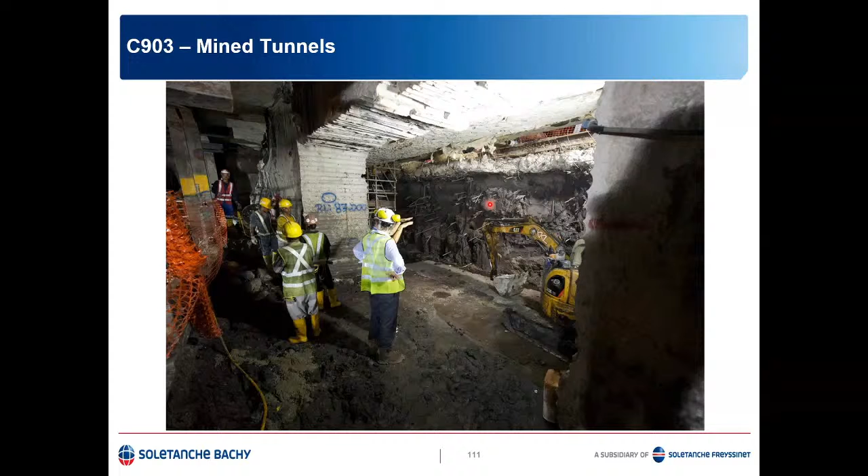Once this is done, we have to put a series of nails so that the nails will hold the soil from falling on your face. And then you remove them as you go. These rebars are actually GFRP rebars, which are easy to break. These are the glass fiber rebars. And you carry on like that.

Now you can see here, this is the train. This is where the train is running. This is the platform slab. And this is the new beam that we have made. This diaphragm wall is, you see the shape. This is exactly what I showed in the old picture earlier. We are actually getting underneath this. Now, this is actually the top heading. So this is the top bench. And then I still have another 5-6 meters to go below. I will show you in the next photograph. You see the frames are there.

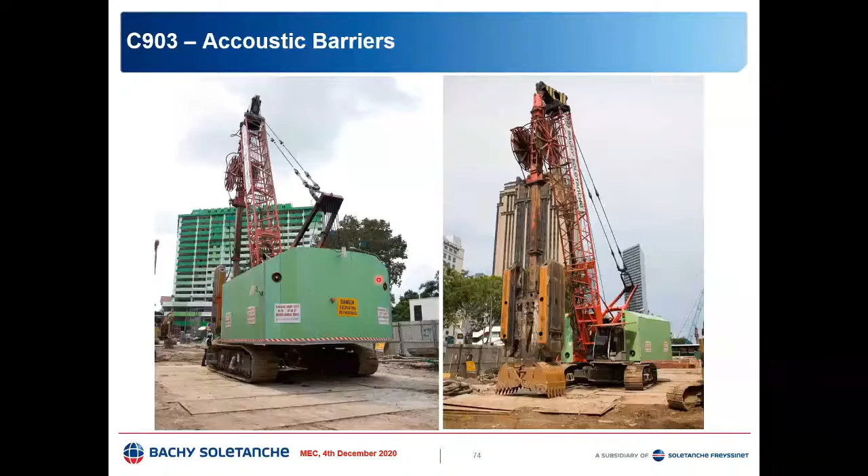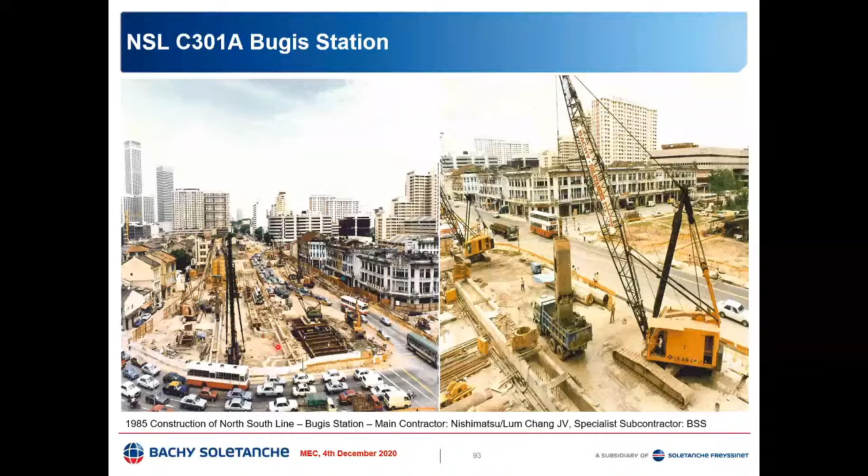Okay, so here this is much more clear. You can see this shape. This is the shape that we were doing many years ago, in the photo that I showed earlier. This is the old photo that I was trying to show. I think I lost it. Okay, so this is the photo. Can you see the shape here? This is the shape that we are actually mining 35 years later here. This is the place. So you can see here, this is exactly the same wall that we installed 35 years ago.

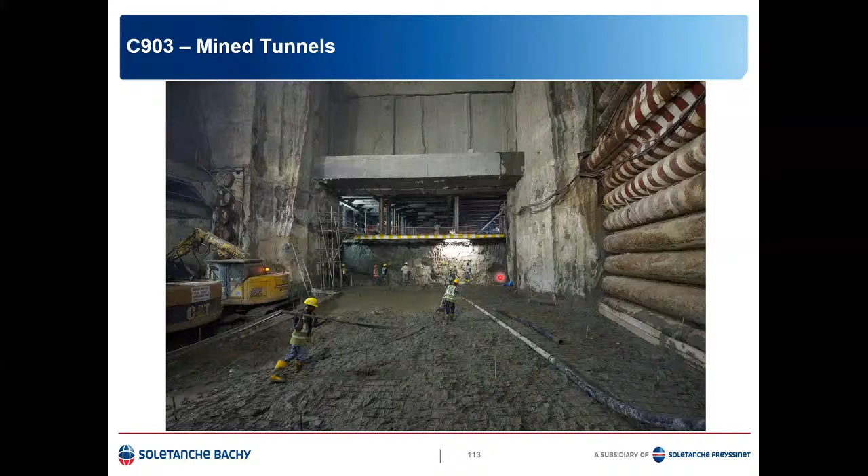So now this is the top bench. We made the frames for half of that. The invert is to be excavated. So you can actually see that the pipe roofs are already in place. The frames are in place, but the frames are not complete. They have to come all the way down. This soil is not removed. This is the bench. Once you remove them, you have completed the frames. Once the frames are done, you start pouring the box, the slab and the side walls. And with that, you complete the work here.

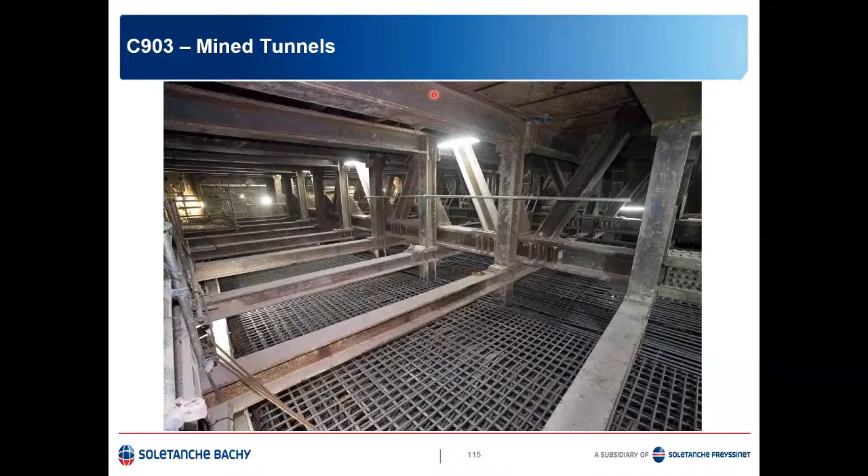So this is how it is done. You can see the frames. And you can also see people are pouring the roof slab between the frames, and the concrete will be poured and you make the slab. And the train will start running underneath here. And these frames, some of them will be cut and removed, some of them will be left in place. And the train that's running live is just above here. Now the work is completed. You can see that people can go from one side to the other at 80 meters. And this is actually the completed work.

You can see here that this is actually the existing station. Here they are pouring the roof slab. Once this roof slab is done, you go down to the bottom. You know what is this?

This is actually from the existing station. They will make some sumps and pits. This is hanging from the existing platform slab or the concourse slab. So you can see all the structure is completely exposed. This is the old diaphragm wall.

You can see we have cut it. This is the old rebar that we put in 35 years ago. We cut through this, and then people are pouring the roof slab for the new one, which is perpendicular to this. So with that, it's completed.

I know this is not easy. This is a very complex project, and to explain in 45 minutes is not easy. I hope I managed to do it. With that, I will complete my presentation, and if you have any questions, I'm happy to answer them.

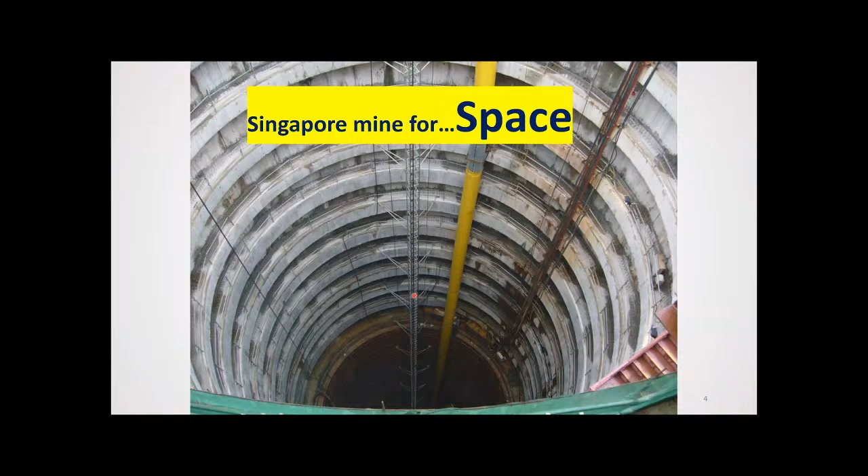Now, when you think about mining, what do we mine for? We mine for minerals, metals, precious metals, gold, silver, copper, etc. Sometimes we mine for diamonds also. But here in Singapore, does Singapore mine for minerals or wealth? No, Singapore mines for space. Singapore is a small island, around 50 by 40 square kilometers, so it is not a very big island. Space is always a constraint, so Singapore is always looking for space creation. It cannot expand horizontally because of limitations from the sea on one side and Malaysia on the other. So they mine underground.

Now, if you study the rock cycle, magma comes up to the surface and becomes igneous rock. Because of the sun and rain, it erodes, gets transported, and deposits into the sea. With deposition layer upon layer, and with pressure over millions of years, it becomes solid rock - this becomes sedimentary rock. With pressure and high temperature, it becomes metamorphic rock, which can come up to the surface or join the mantle and magma, coming up as igneous rock. Basically in Singapore, you will find sedimentary type of rock most prominently, and igneous rock.

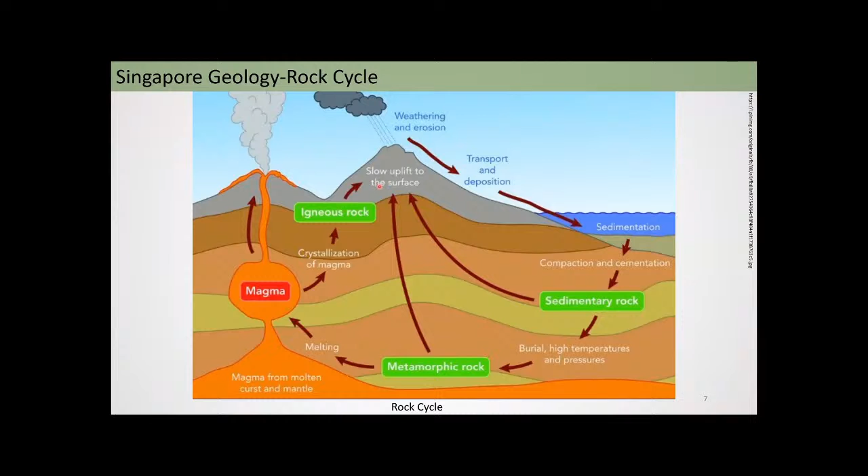If you simplify this, we can see this is the Jurong Formation, and this is Bukit Timah granite. We call it Bukit Timah granite because of this Bukit Timah area. For our civil engineers or geotechnical engineers, this is how we consider this island: sedimentary rock, then igneous rock, old alluvials, and then other sediments over here.

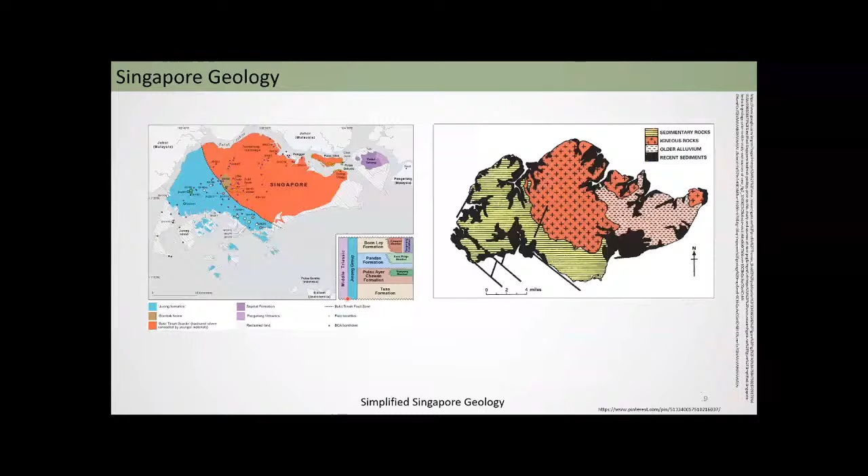So we come to know about the geology based on the boreholes. Now in Singapore, we have the Nanyang Technological University and

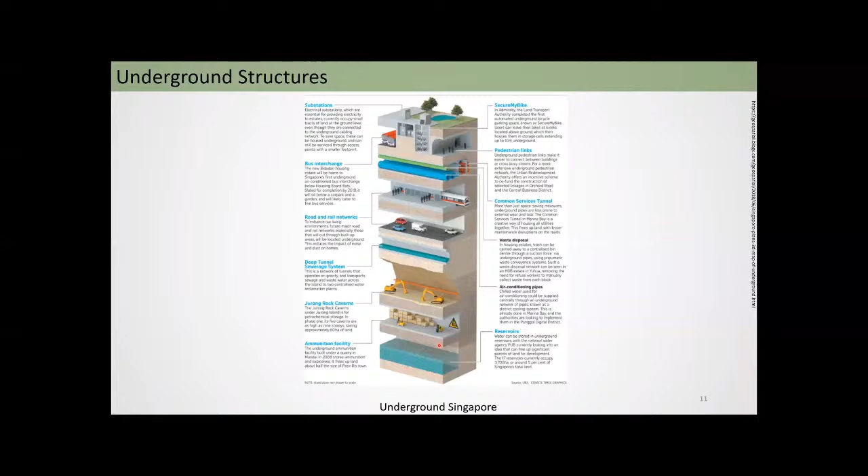For the DTSS2 project, this is a 50-kilometer long tunnel, and it will be completed by 2025. It is around a $6.5 billion project, with 5 contractors working on this phase 2. Three tunnels are going under the subsea.

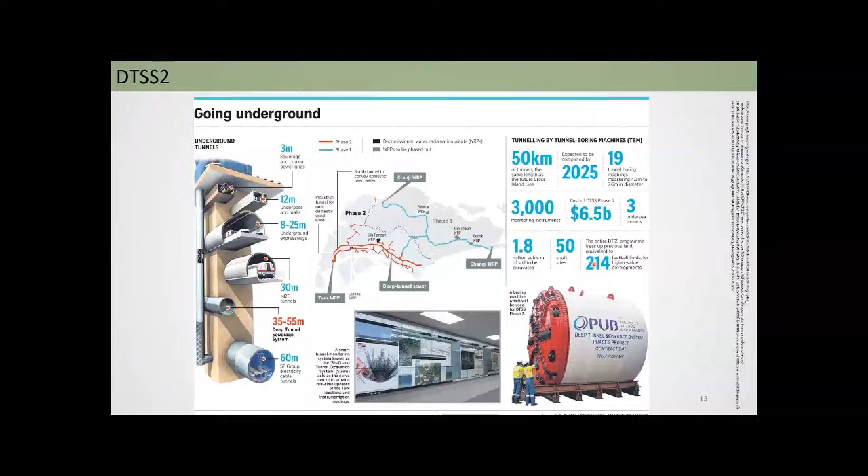Then we have the inner secondary lining. This inner secondary lining is MIC resistant concrete, a microorganism induced corrosion resistant lining, because this sewer will be carrying wastewater. So the inner lining should be resistant to chemicals and bacterial activities. That's why they use this MIC lining.

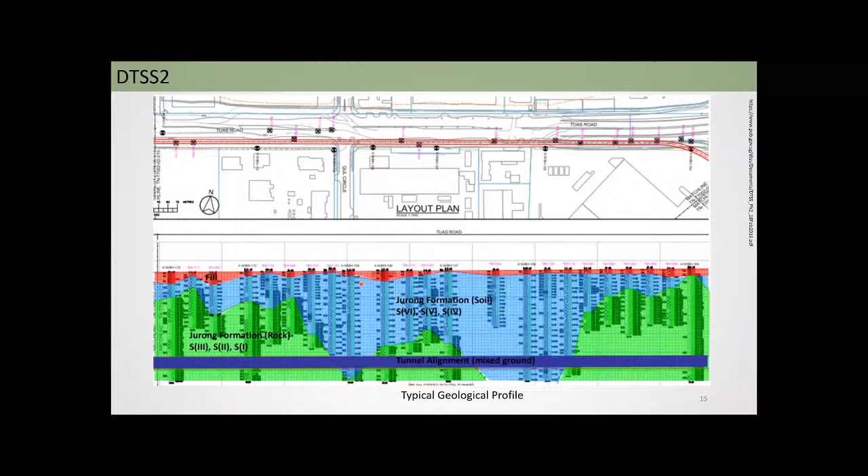And these boreholes are around 50 meters apart, not more than that. Sometimes we can have the boreholes 30 meters apart also. Another specialty of this DTSS2 is that it not only carries the wastewater, but it has other facilities also, like air jumpers and an odor control facility.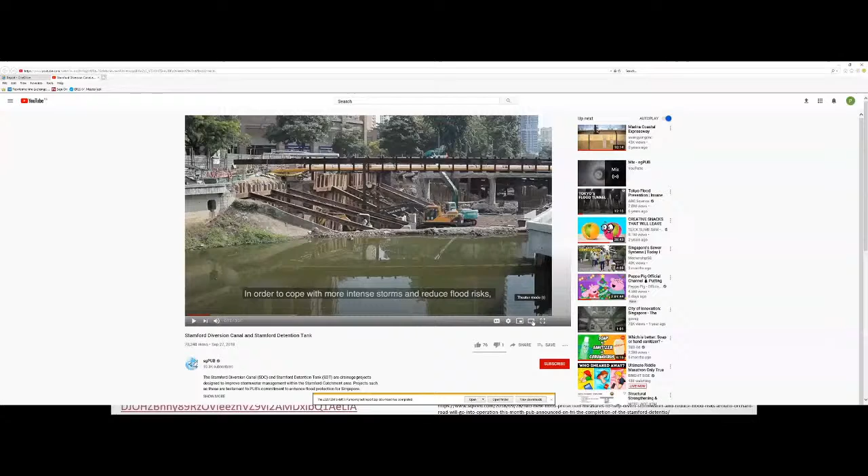If you allow me, I can play a video of 2 minutes. Is it okay to show the construction of this one? Yes, Mr. Praveen. Yes, sir. It was playing on my screen. Okay, can you see this video? Yes, sir. Okay, can you hear? Yes, yes, we can hear.

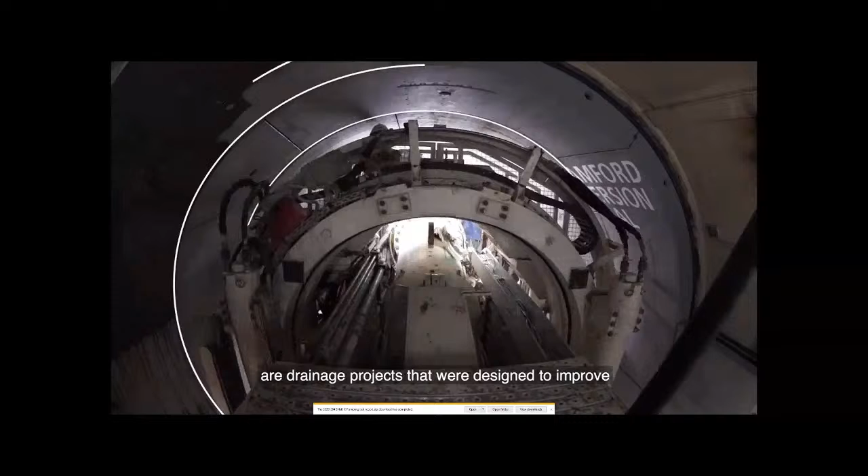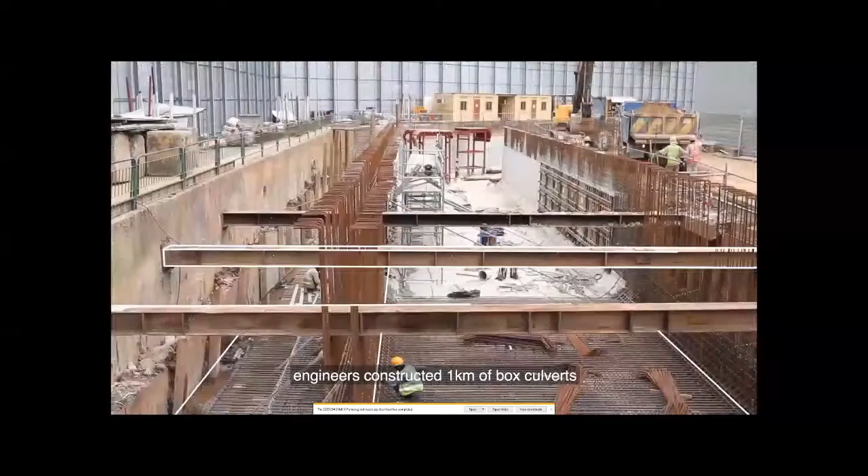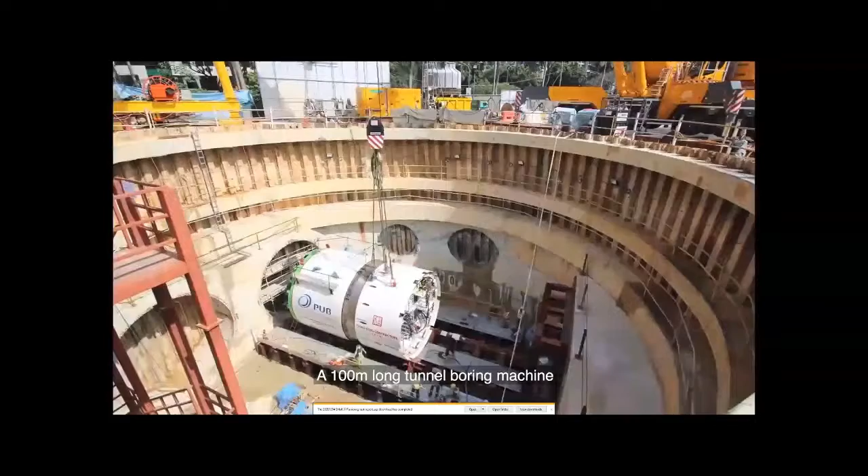The Stamford Diversion Canal and Stamford Detention Tank are drainage projects that were designed to improve stormwater management within the Stamford catchment area. Due to space constraints, PUB was unable to widen or deepen the existing Stamford Canal without causing great disruptions to businesses, motorists, and pedestrians at Orchard Road. The solution was to construct a diversion canal to divert excess stormwater and a detention tank to temporarily collect and hold back excess stormwater during heavy rain events. To build the Stamford Diversion Canal, engineers constructed 1 kilometer of box culverts ranging from 7 to 14 meters wide. A pair of 1 kilometer long tunnels were also constructed in densely built up areas to minimize disruptions to residents and motorists. To build the tunnels, a 14-meter deep shaft was first constructed. A 100-meter long tunnel boring machine with an excavation face of 5 meters in diameter was then assembled in the shaft. As the tunnel boring machine digs through the soil, it lays concrete segments to form the tunnel.

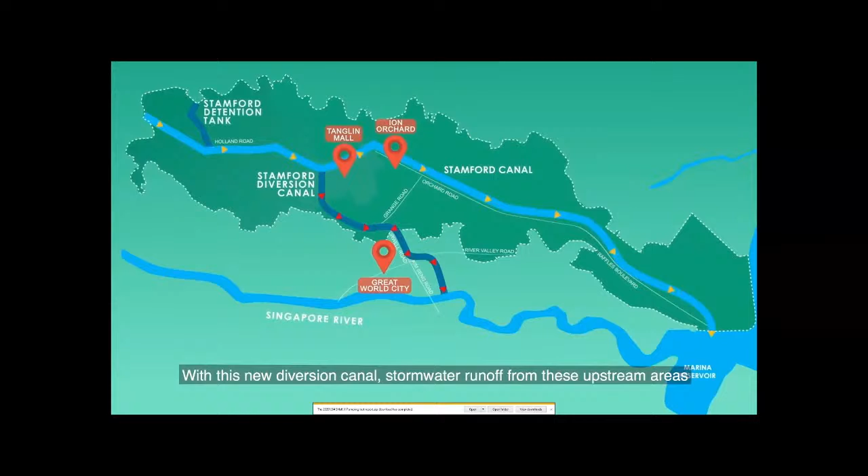Previously, the stormwater runoff from upstream areas such as Holland and Napier Road areas would flow into the Stamford Canal sited under Orchard Road. With this new diversion canal, stormwater runoff from these upstream areas will be channeled towards the Singapore River, therefore reducing the load on the existing Stamford Canal.

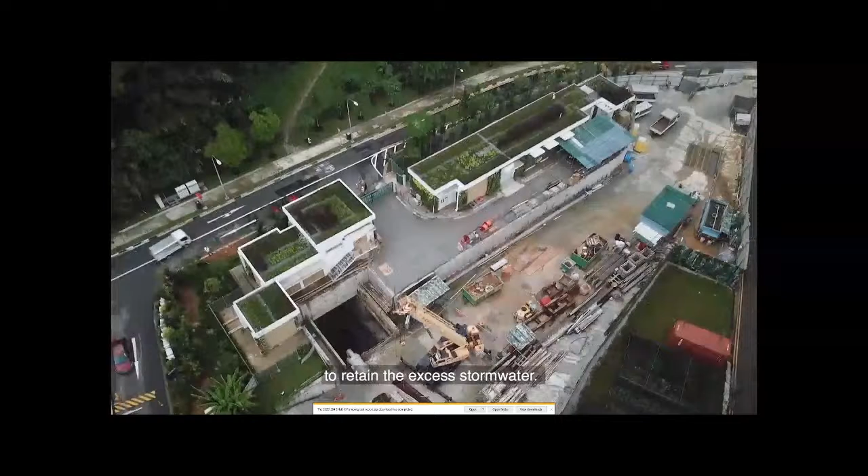The second drainage improvement project for the Stamford catchment involves the construction of a detention tank underneath the Tyersall Learning Forest and National Orchid Gardens nursery to retain the excess stormwater. The tank draws water from the existing drain along Holland Road. An overflow weir with 6 5-meter wide gates was constructed to control the amount of water to be diverted into

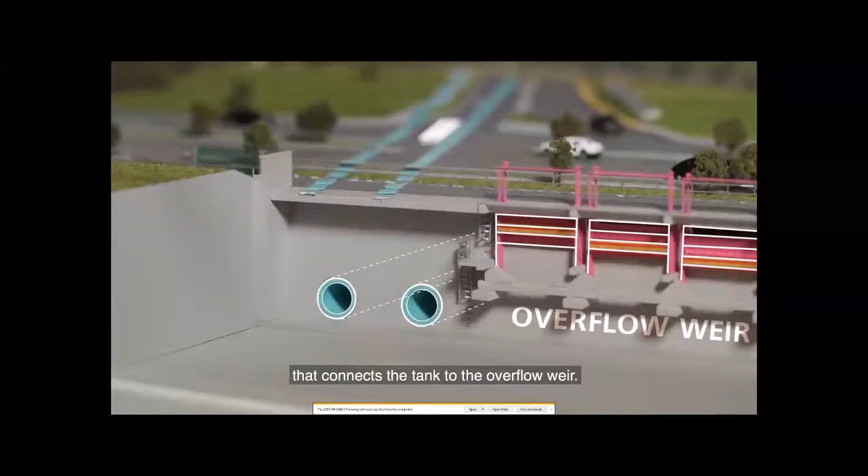the tank. Pipe jacking machines were used to build a pair of 2.5-meter diameter pipes that connects the tank to the overflow weir. By holding back excess stormwater during heavy rain events, the Stamford detention tank will slow down stormwater that enters the Stamford Diversion Canal.

This automated facility can collect and retain 38,000 cubic meters of stormwater, which is equivalent to the volume of 15 Olympic-sized pools. After the heavy rain subsides, the tank will release the water back to the empty drains.

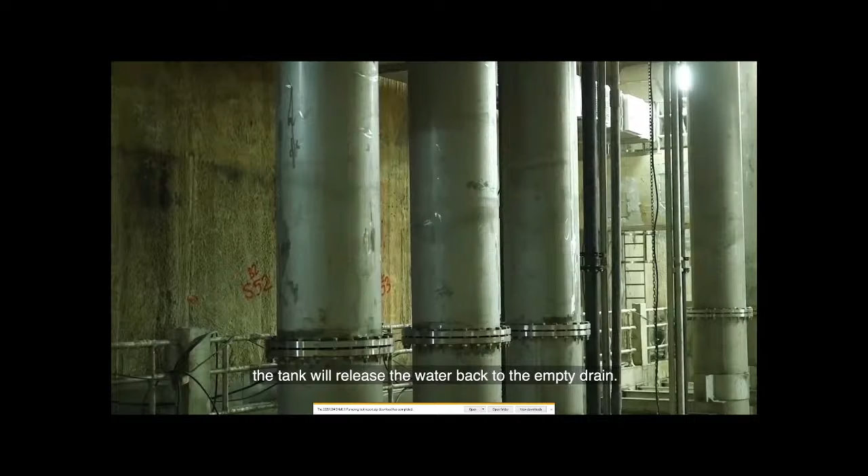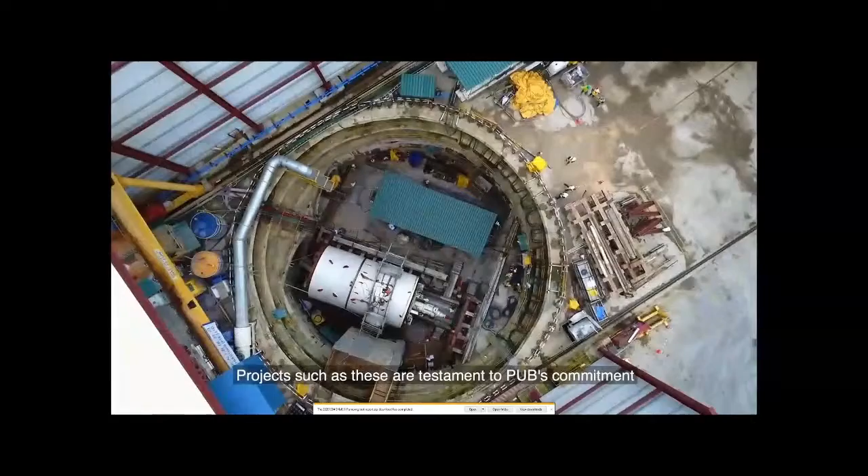The Stamford Detention Tank and Stamford Diversion Canal are all-encompassing engineering projects that were realized with the dedication and hard work of the engineers. With their completion, we can now divert 30% of the stormwater away from the Stamford Canal, thereby lowering the flood risk to the Orchard area. Projects such as these are testament to PUB's commitment to continuously improve our stormwater management and infrastructure to enhance flood protection for Singapore.

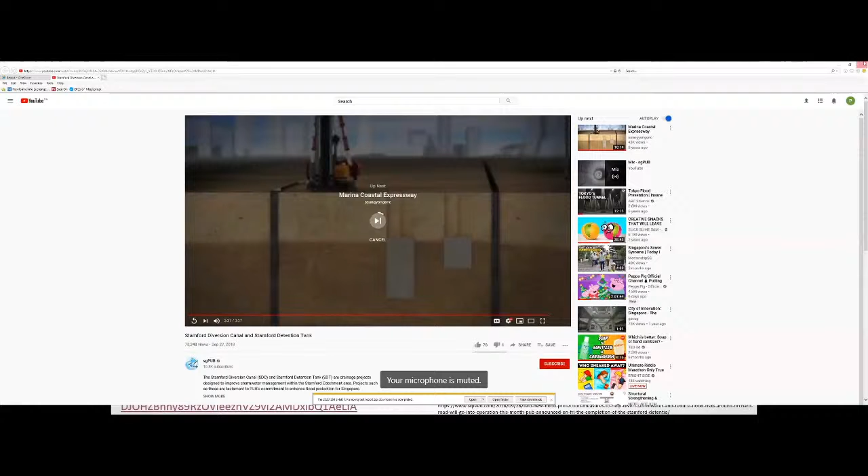Okay, so this is the Stamford detention tank. Now, another project, that is Jurong Rock Cavern. This is also an iconic project which is constructed on Jurong Island in Singapore. Mostly this island, if you see, is backfilled, just like the Semakau Island, which I have shown. This is the backfilled island.

Can you see this cursor? Yes, we can see.

Okay, so this Jurong Rock Cavern, if you see this area, these are the oil storage tanks. If you see the specifications, they're very stringent. You have to keep a safe distance between two tanks, and a tank can be around 15-20 meters wide by 15-20 meters tall maximum, or some short tanks also, and it will take a lot of space. A lot of space has been consumed over here.

So to save the space, what Singapore has done is to go underground. By constructing these two Jurong Rock Caverns, they have saved around 60 hectares of surface land. Now, there are some terrorist activities also going on in the area. If these facilities are attacked, it will be a disaster for Singapore.

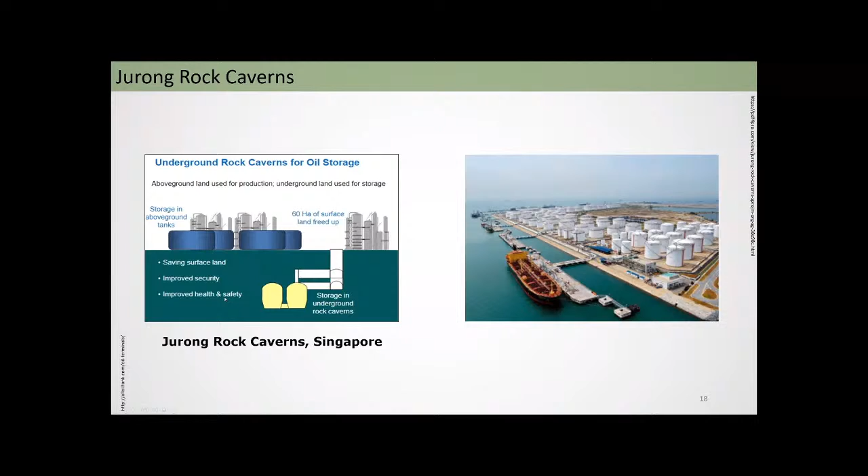These are twin caverns. This is one cavern over here, and this is another cavern, and the two are interconnected. The section is around 20 by 27 meters, and the length is around 340 meters. So you can think of the enormity of this project.

This is the water curtain gallery. From this access shaft over here, we have the adits and tunnels. You go around 120 meters down, and then we have these tunnels. This is the access tunnel over here. Sorry.

Okay, so this is the access tunnel over here to this one. And then this is the water curtain gallery tunnels. And through this one, they are sending the water under pressure. So we have these water curtain galleries over here.

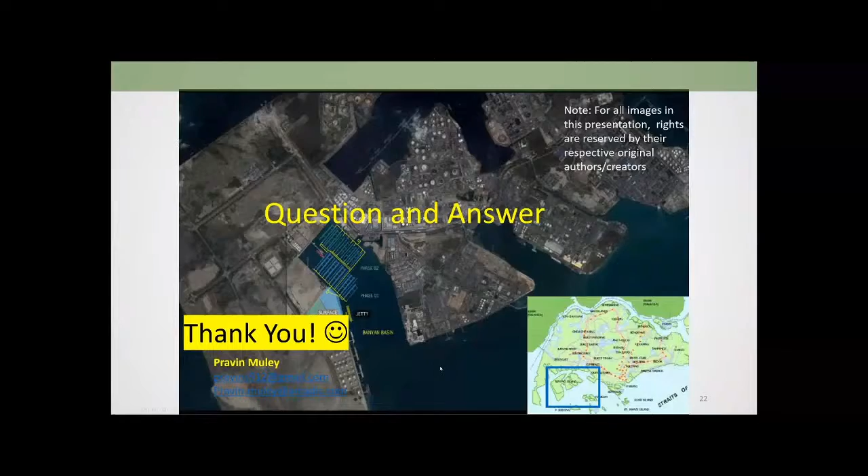Yeah, there is a question from Sanjay Gupta. What's generally the depth of the rock? Wait, sorry. What is the question?

What is the depth of the rock generally? I mean, for instance, you have this storage part. In the storage, you have shown the cross section with the rock and the soil, right? So what is generally the depth at which we get rock in the Singapore area?

In Singapore, in some areas, now I'm working on the DTSS2 project, where we have shafts around 60 meters deep, and we have not come across the rock. But at some locations, we have the rock around 40 meters deep. So generally I can say that the minimum depth of rock is 40 meters? Yeah, 40 to 50 meters you will find the rock. Okay, right. Thank you.

So, Pravin, we have a question from the YouTube chat box. What is meant by mixed soil? Does it mean weathered rock? Sorry, mixed? Yeah, what is meant by mixed soil, and does it mean weathered rock? Oh, mixed ground. Mixed ground, I was saying.